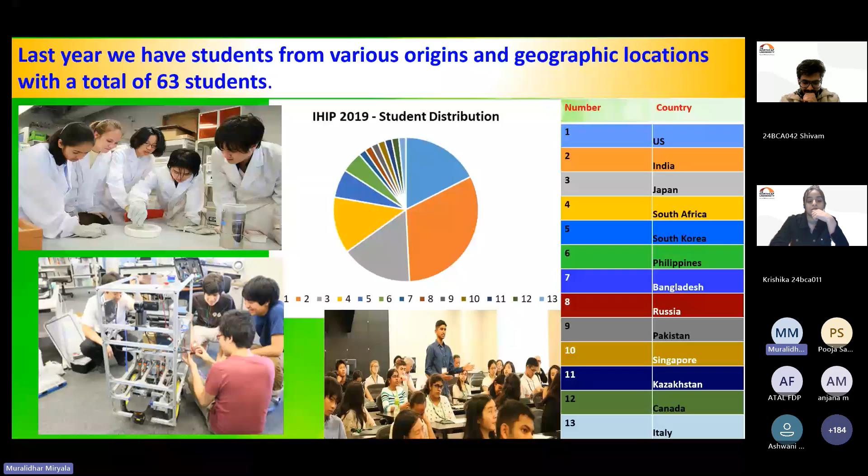This is another short-term engineering English program involving departmental visits, where our Japanese students go to India for a shorter, 2 week based program. At SIT, during winter and summer breaks, batches of 30 to 40 students go to India. We started this in 2013 and are still continuing the program with IIT Madras and Anna University.

So this is how we systematically dispatch our students through departmental visits. In the English engineering program, students have to learn for 3 hours every day, along with cultural visits and cultural exchange trips. Normally on Saturdays and Sundays we arrange industrial visits. This program has also been very successful.

Our Japanese students are enjoying learning about Indian culture and things. This is another global full-time program. As a result, we made the IGP, Innovative Global Program.

This is a 100% English-based program at SIT, and also the graduation course, a 100% English-based master's program. Students can join various departments. Of course, the doctoral program is fully funded, a 3-year program. Everybody is interested, it's very attractive.

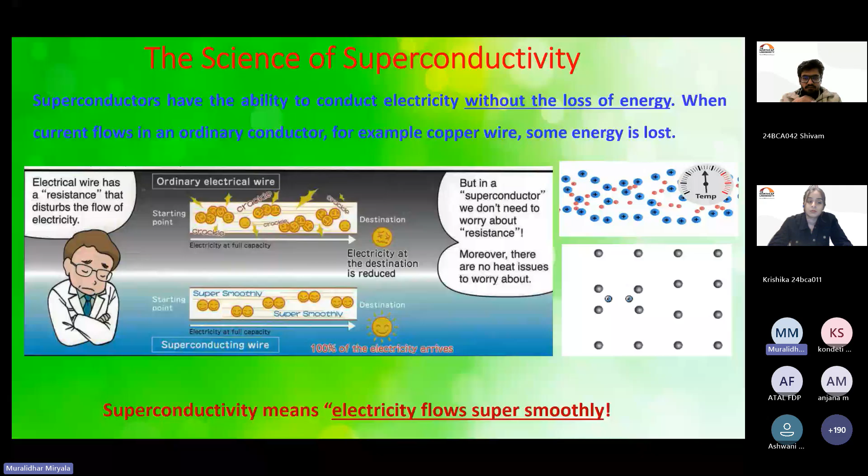Here's a very interesting phenomenon we have to know. When the material transfers from the normal state to the superconducting state, it expels the magnetic field from its interior. This phenomenon is known as the Meissner effect, discovered in 1932 and first observed in 1933 by Meissner in tin and lead materials.

This is called a type 1 material, which has a critical magnetic field, HC. Above it is a normal conductor. In the superconducting state, it becomes a perfect diamagnet, and magnetic flux is expelled, acting to levitate any magnet placed above it.

Then Onnes thought one could make very powerful magnets, because for an electromagnet we send current and the resistance is zero automatically, so he thought we could make it. But here's the logic of type 2 superconductors and the critical magnetic field.

For example, materials like aluminum and cadmium have several critical temperatures, TC, for superconductivity. But if you apply a very small external magnetic field, around 105 Gauss, the superconductor is destroyed. Similarly, for lead, at around 800 Gauss, the small magnetic field makes it disappear. Typically, almost all type 1 superconductors are destroyed at around 1000 Gauss.

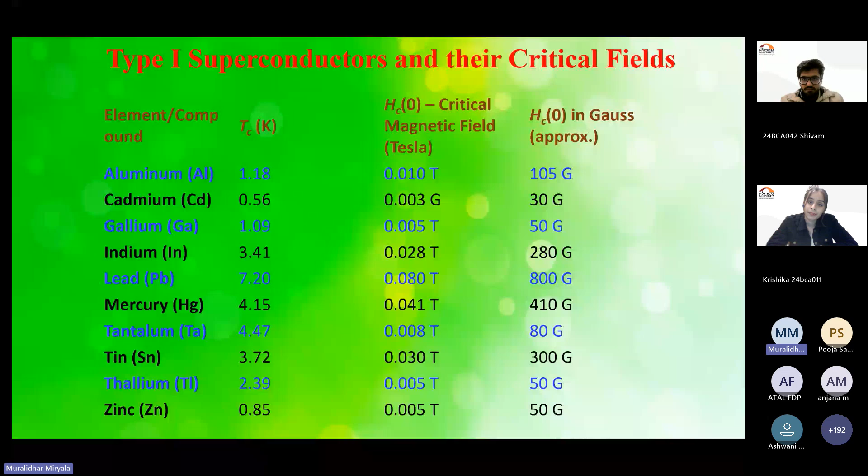So this is one of the great barriers. The dream of Onnes to make a strong superconducting magnet remained only a dream until the 1960s. In the 1960s, a breakthrough came, a new type of superconductor was discovered, called type 2 superconductors, like niobium tin. Importantly, type 2 superconductors have two critical magnetic fields, called HC1 and HC2. Above HC2, it becomes a normal conductor.

Below HC1, it is the perfect diamagnet. Between HC1 and HC2, we have the mixed state, where superconductivity and a magnetic field coexist. In this case, magnetic flux can enter inside. If you have strong pinning centers, it will be trapped inside. As a result, one can make very powerful magnets. That's why NbTi magnets are now being used in hospitals, like MRI machines.

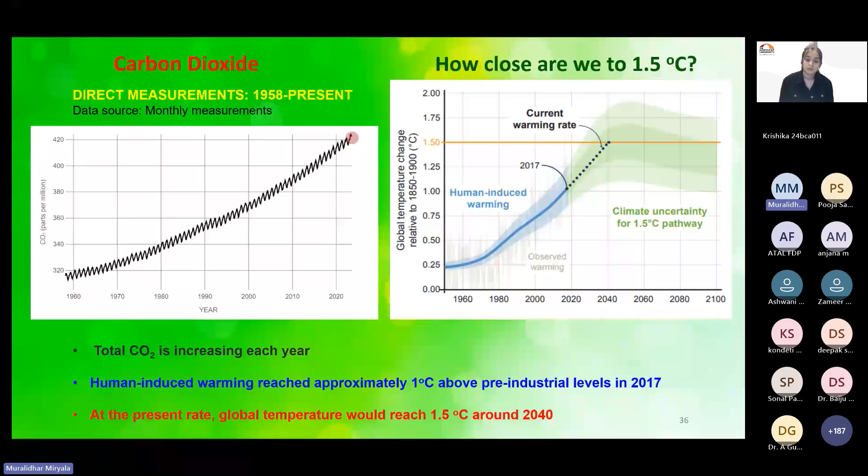Now people are thinking at the present rate it will reach 1.5 degrees by 2040. But the biggest issue is that in the last 2 years, science and nature are clearly reporting extreme heat and loss of Antarctic sea ice as one of the biggest issues everybody is thinking about. Especially, recent surveys clearly indicate that climate change is a major global issue.

According to a 2021 survey, around 60% of young people aged 16 to 25 reported being concerned about climate change. They clearly indicated it affects their daily lives, including their work and sleep. So we have to properly work on how we can address it.

Before I mentioned that by 2040 it's going to reach around 1.5 degrees centigrade of atmospheric temperature. But recent data clearly indicates that on Earth Day 2025, the figure was 429.6 ppm. But even to reverse climate change, even partly, we will need to remove on the order of 2000 gigatons of CO2 from the atmosphere over the next century, which is the biggest challenging issue now.

Recently reported, even though we are talking about an estimated 1.5 degrees centigrade increase, it seems they will increase this before 2030 instead of 2040, which is more problematic. So how do we control this situation?

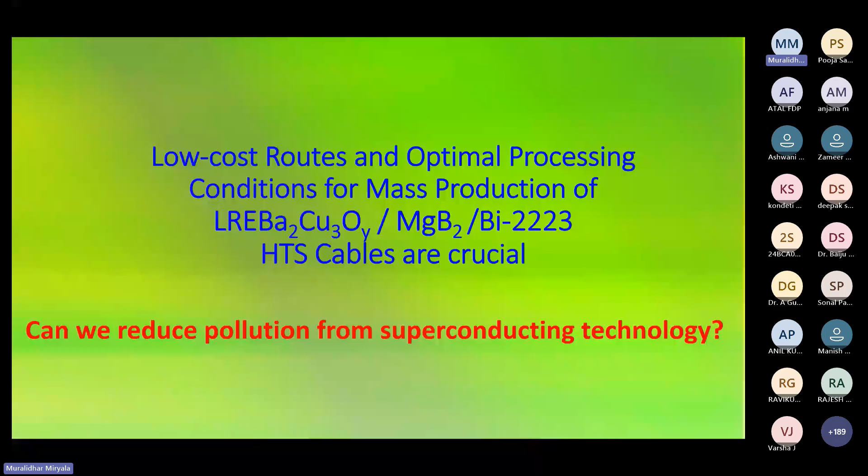We can say like LRE123, MgB2, or Bismuth 2223, where HTS cables are one of the crucial applications. HTS superconducting technology will address the impact of climate change. Energy transportation will be done by HTS cables using Bismuth 2223, RE123, and MgB2, which are already well developed. On the other hand, energy storage through superconducting magnetic energy storage systems and flywheel energy storage can be done using bulk RE123 and MgB2 superconducting magnets.

I want to mention why HTS superconductors matter. They were first discovered in 1986 by Müller and Bednorz, who discovered the new material lanthanum barium copper oxide, making materials superconduct at higher temperatures. Within one year, in 1987, Paul Chu replaced lanthanum with yttrium, raising the critical temperature for superconductivity to around 93 Kelvin, higher than the boiling point of liquid nitrogen. This was very interesting, and people started to work on this material for real applications.

However, with this YBCO material, when you apply a magnetic field of around 3 to 4 Tesla, the superconductivity drops to zero, so we cannot use it for high field applications.

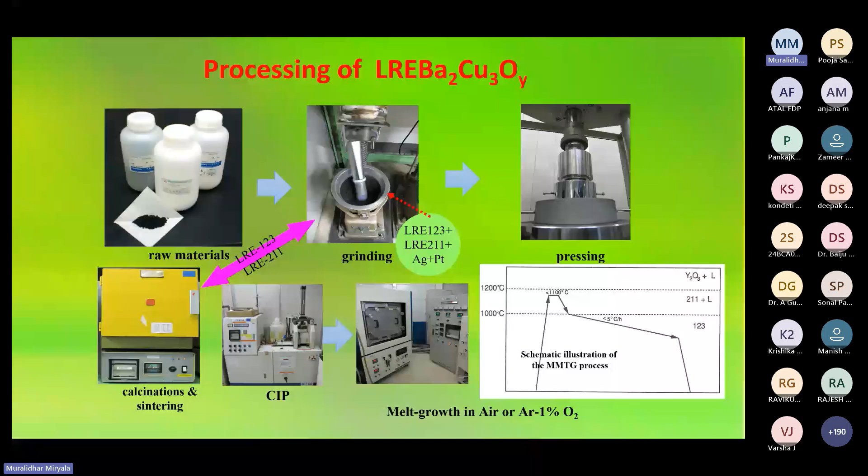So we successfully produced high quality bulk superconducting magnets, among the best in the world. This magnet can trap more than 4 Tesla at 77 Kelvin—I will show some data later. One important thing here is this ternary RE123 material.

We created nano pinning using smaller GD211 nanoparticles inside, which are non-superconducting and pin the flux in high magnetic fields. As a result, one can achieve a very high critical current density.

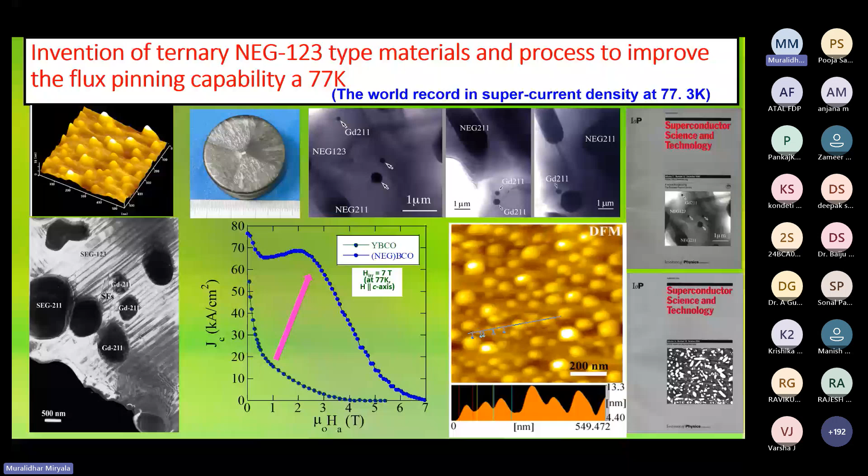This result was featured several times as the top cover of Superconductor Science and Technology journal. This amazing accomplishment was highlighted in many newspapers and TVs, and it was patented in the US, Europe, and Japan, receiving numerous awards worldwide.

Then the second thing - we also made SEG and EG, creating new nanoscale pinning centers visible in TEM. We made very small zirconia-based nano pinning centers, around 30 to 40 nanometers in size. This has been discovered, and we also obtained a new patent on this.

In the case of YBCO, this was demonstrated at 77 Kelvin, but here we achieved 90 Kelvin - the first report of this. This is fundamental and can be used for non-contact liquid oxygen pumps in hospitals, and also for rocket launching technology for superconducting bearings.

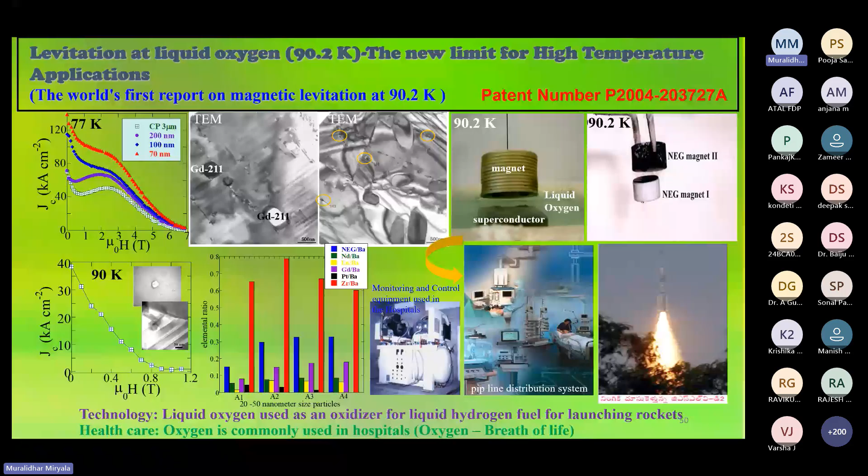Again, these results appeared in the news and TV, and received patents. It also won awards from Japan and different countries.

So when you want to use something at 77 Kelvin, for example, I'm showing a block diagram here from 0 to 14 Tesla, then JC. If you want to make a motor application, 1 to 3 Tesla is very useful.

For other applications like maglev, flywheels, or MRI machines, it's around 2 to 5 Tesla. But people are now working on fusion magnets, which need 10 to 15 Tesla - very, very important.

But in this case, at that time there was no material available. Even at 77 Kelvin, up to date, this is one of the champion data points.

What we did here is a new class of nanoscale pinning media, ranging down to very fine nano order, close to the coherence length. When we manipulate the matrix ratio - 1:1.25:0.85 - it shifts toward a rich direction. We made nano pinning inside at 3 to 5 nanometers, as shown by STM.

As a result, JC which was previously 4 to 7 Tesla is now exactly doubled to 15 Tesla. This means when you control the microstructure in this 1-2-3 matrix, one can achieve a very, very high irreversibility field, which is extremely important for high-field applications using RE123 materials. Introducing flux pinning centers at the nano order is very, very important.

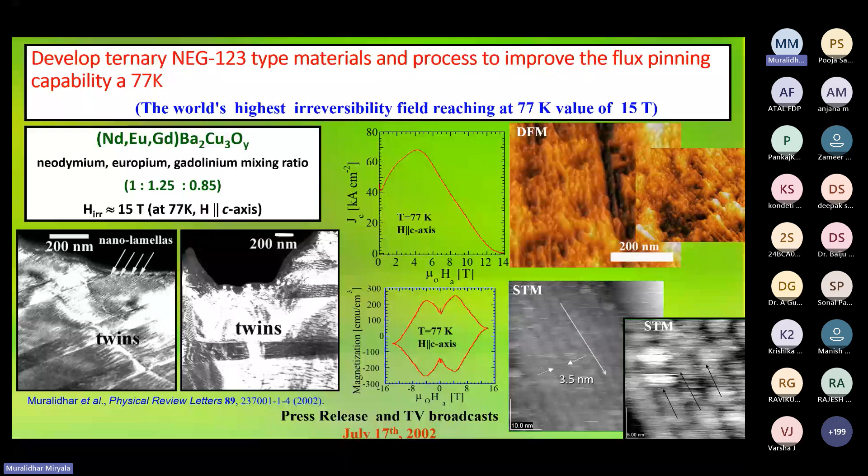As a result, we made larger materials, because the trapped field is proportional to JC times R - meaning carrying capacity times the diameter of the material. We made the world's largest size material as a result.

We cannot have more than that with permanent magnets - it's very impossible. But in superconductors, there is no resistance, so one can make very, very strong magnets.

But the other challenge we faced is that a 2 centimeter or 4 centimeter superconducting magnet costs $3,000 to $4,000, and we needed to reduce the price. So we made it systematically, as I explained, like batch production.

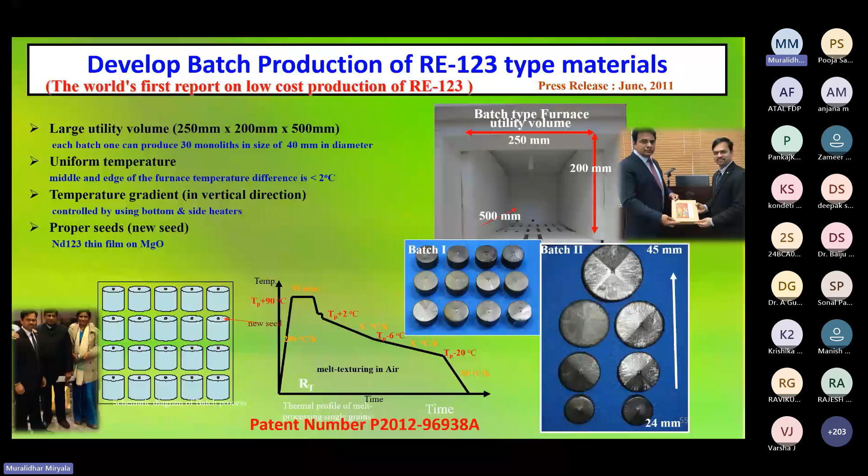In our case, we optimized so many things, and also used this new patent. We made more than 60% reduction in cost. Now this batch production is a more successful development of RE123 systems, low cost. Then people like so many companies are producing yttrium 123, gadolinium 123, ideal material for permanent magnets. That's why they are making so many batch productions.

This is one example. We made a strong and steep gradient generated by the HTSC material to control the drug inside your body. Normally the magnetic field is placed outside the body. The magnetic seed drug is injected into the body vessel and navigated to the desired part by the very strong external magnetic fields. This can be applied, even though this is one example.

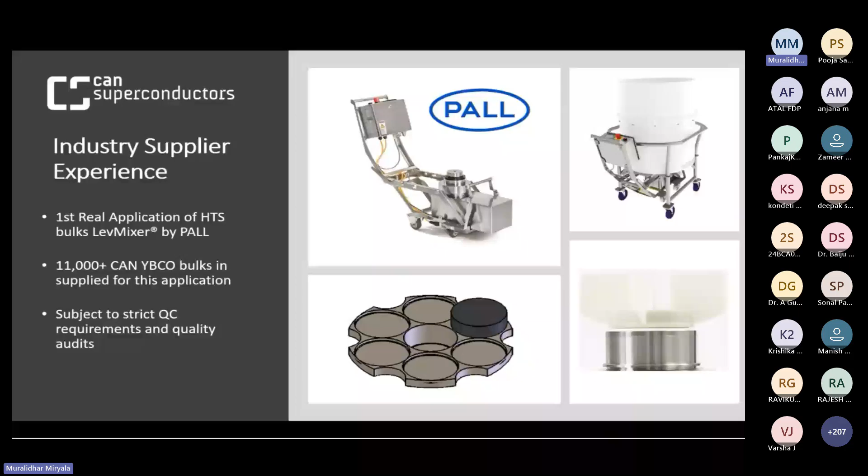Kyushu Electrical Power Company already made a mobile type water cleaning system. I made this in the Kyushu area for several lakes and ponds. This is one of the commercial products. Due to this strong field, one can make it more thin.

So then, one application is transport, where one can use this material. Transport means they always need high reliability, and of course low carbon vision strategy is one of the big players. The Prime Minister of Japan also declared they want to make 50% CO2 emission reduction by 2030, 75% by 2050. Then everybody is putting more efforts into railways as well.

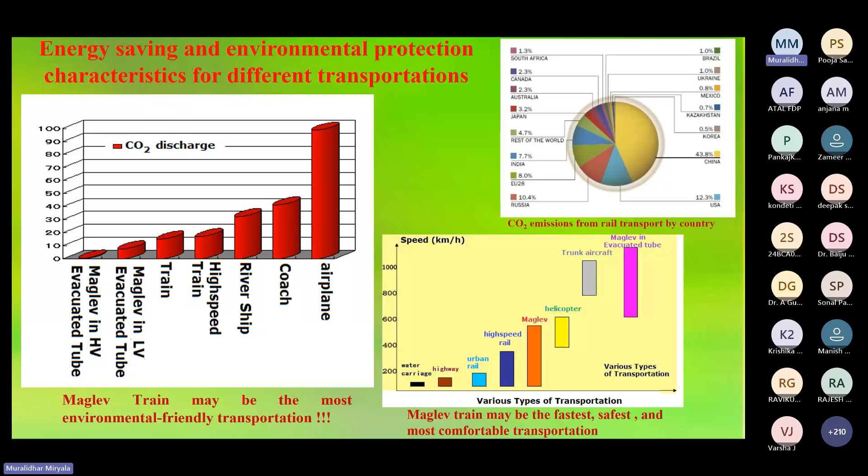If you look at this, the top left figure clearly indicates the lowest CO2 discharge is the maglev, magnetically levitated train, or maglev evacuated tubes. But of course we have to consider the speed too. In this case, the bottom picture shows maglev trains going more than 600 kilometers per hour. This research started in 1972 at RTRI, achieving a speed of 60 kilometers per hour.

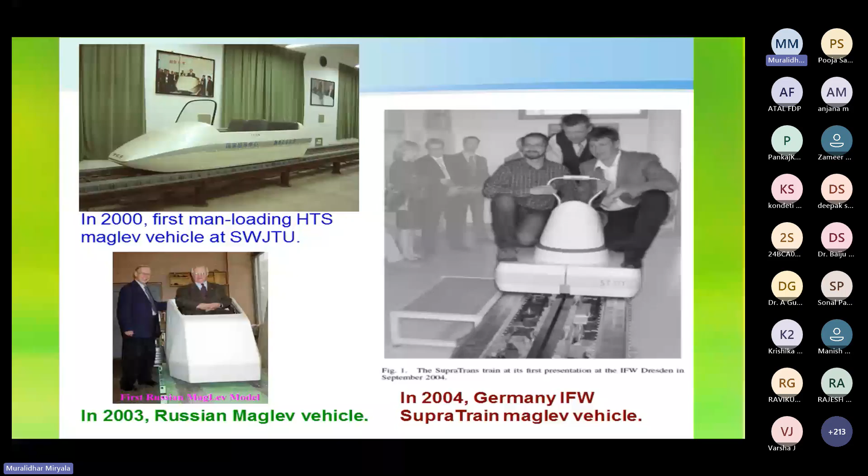This was successfully created, the high TC maglev. After this result, prototype vehicles utilizing the high temperature superconductor were shown by various countries like China, Russia, as well as Germany, and also the prototype vehicle maglev Cobra developed in Brazil, utilizing the same yttrium-123 superconductors and levitation for the transport system.

This is the world's first high temperature high speed maglev, large type prototype, designed and reported in January 13, 2021 by SWJTU, the Southwest Jiaotong University in China. So again, here is the prototype HTSC maglev in evacuated tubes.

Also, of course, everybody knows the Hyperloop. Now the US and Germany collaboration is working, but this is the research collaboration with SWJTU. We supplied the YBCO material and made it work at 150 kilometers per hour inside, and now we are working at 300 kilometers per hour. All these things can reduce low carbon emissions and make our lives easier.

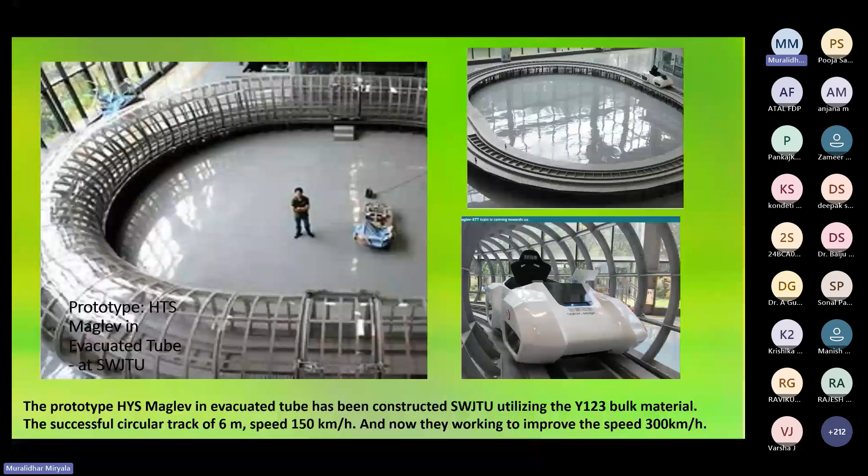Then again, another type of material we are using is the production of low cost and high performance bulk MgB2 material, called magnesium diboride. MgB2 is one of the most low cost, high performance, lightweight materials. One can use it in several industrial applications.

Of recent days, rare earth is the problem. What I showed before is the rare earth based material like neodymium, samarium, europium, gadolinium, made in a 1:2:3 ratio. It will become a super magnet. But here there is no such thing - it's just magnesium and boron. Here is the very interesting part.

One can make it into power transmission, magnetic resonance imaging, MRI. Now Hitachi and ourselves are working together on MRI machines using MgB2, and of course electronic devices, everything - end user, energy sector, medical sector, aerospace, industrial manufacturing, several things. One can make superconducting tapes, and we can use it at low temperature.

Here, one of the major issues is increasing performance, meaning we have to increase the critical current density. What I showed in the table, for motors and generators we need 100 kiloamps per centimeter square. For transformers, 80 kiloamps, then current limiters - where this Mg and boron comes in.

Boron is one of the major drawbacks. Boron's melting temperature is about 2200-2500, while magnesium is 600. Magnesium melts and reacts with the boron to form MgB2. So the smaller the boron size, the better it acts as grain boundary pinning, and as a result the performance goes up.

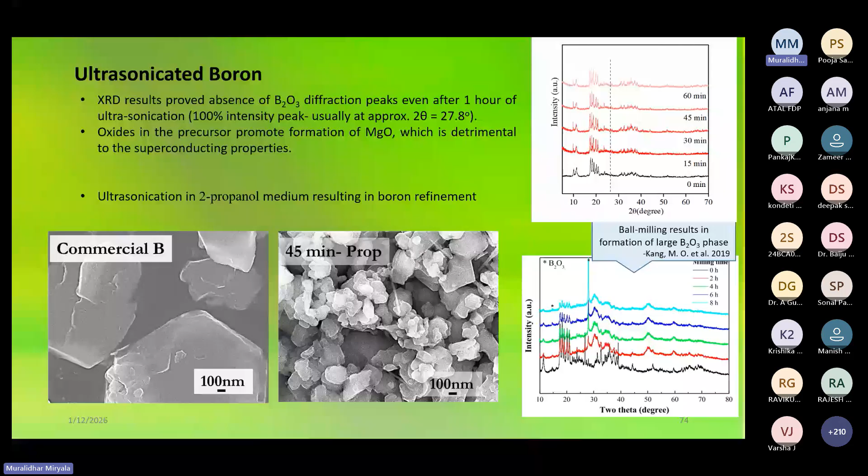Then here, our students and myself designed this equipment more properly for industrial low cost and optimal processing conditions using the ultrasonication technique.

This is the production of nanoboron. Using the cavitation effect, high energy ultrasonification creates ultrasonic waves in a liquid, forming and collapsing bubbles called cavitation. During this process, it generates high temperatures and pressure, shock waves and jets. When these jets and powerful waves are created, as the boron particles come around, they automatically break apart.

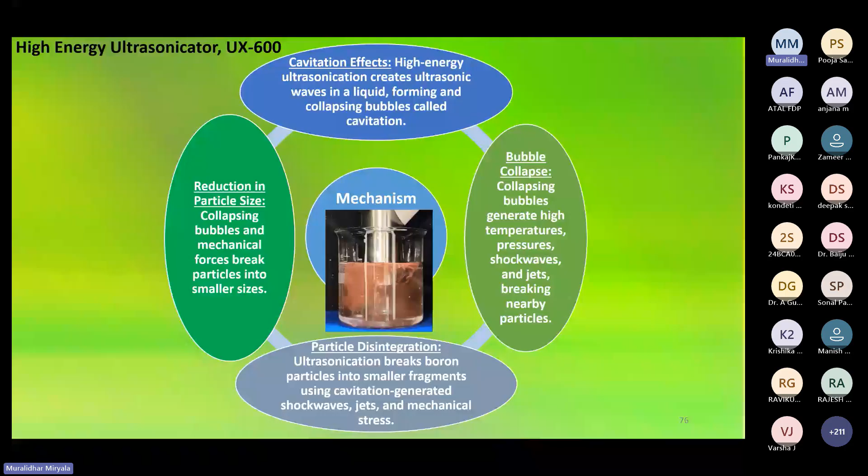This process runs continuously, so one can make nano boron. This is one of the purer methods, allowing very high, smaller particle sizes up to date. During this process, we found that when you utilize high viscosity ultrasonification media, it directly produces a bombarding effect, like a drag force proportional to the bombarding impact.

As a result, the particle size goes down and JC increases when the viscosity is increased. So we use 1-heptanol, which is a high viscosity material. Notably, particle size went down to 170 nanometers. Up to date, no one has reported this.

Then the XRD results, you can see in the right hand side figure, for several hours ultrasonicated in heptanol, from 0 minutes to 135 minutes there is still no contamination. Normally B2O3 peaks are one of the major issues here, but we are not seeing anything, so it was free of impurity phases.

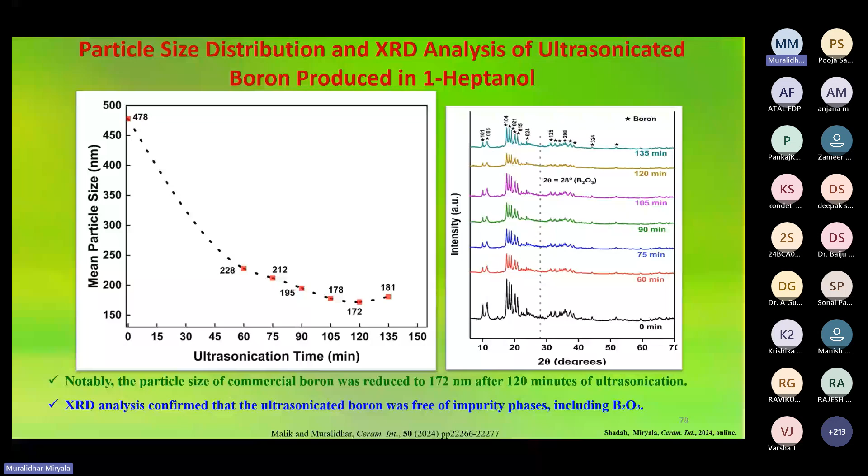Such boron powders can be utilized to make MgB2. This is simple processing: once your nanoboron is ready, we have to mix the magnesium and boron in the glove box. Otherwise, if magnesium is exposed to air, it will react with oxygen and form MgO, which is a non-superconducting particle. That's why people normally do the mixing in the glove box, then pressing and sintering for just 3 hours. It will produce the superconductor. It's very easy, low cost, and lightweight.

Our students are still working to reduce the particle size of nanoboron. We went down to around 150, but the coherence length of MgB2 is around 12 nanometers, so we still have a lot of room to go from 150 down to 72, 17, or 12 nanometers. But in that case we have to optimize so many things. Further, you can use high viscosity material, and tune time, frequency, and temperature, among other factors. I hope we will reduce the particle size further to improve the performance of this MgB2 material.

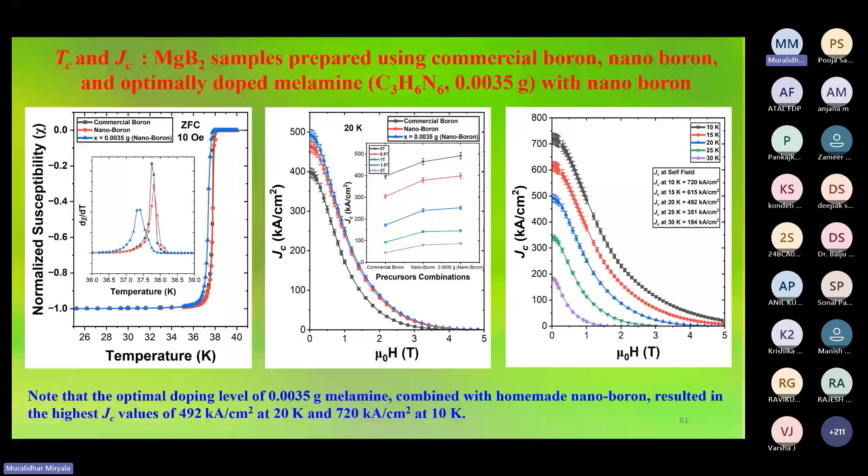But here's the interesting part: we are working with Hitachi, as we need a 5 Tesla MgB2 bulk magnet for MRI, magnetic resonance imaging, for hospitals. If you make an MRI machine using MgB2, it's very low cost. There's no doubt that prices will go down for hospital charges.

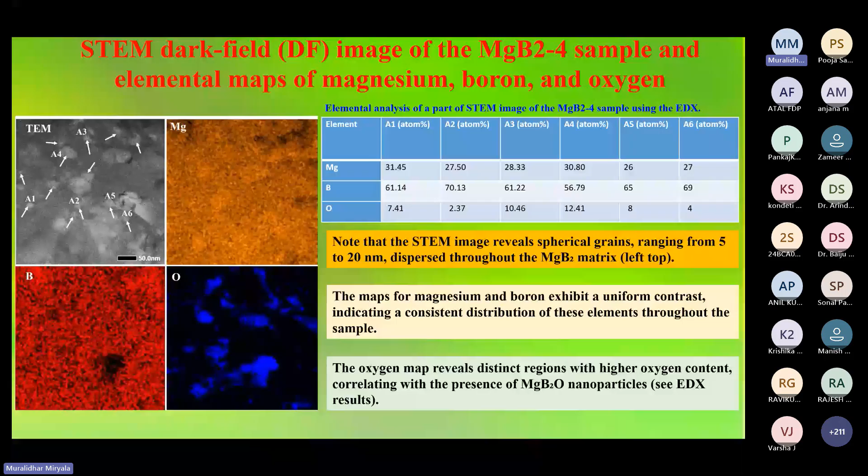If you use this material to make the coil, we can make very high powerful superconducting supermagnets. We also made a patent of this material. So I think in the future, ultralight superconducting magnets, if used at low cost, because magnesium and boron are comparatively rare earth, no, it's very low cost, one will make it. With further reduction of price, one can use it even for windmills, automobiles, rotary applications, washing machines, whatever it may be. This is one of the works we are pursuing. Our students are making further improvement of this material for real world applications.

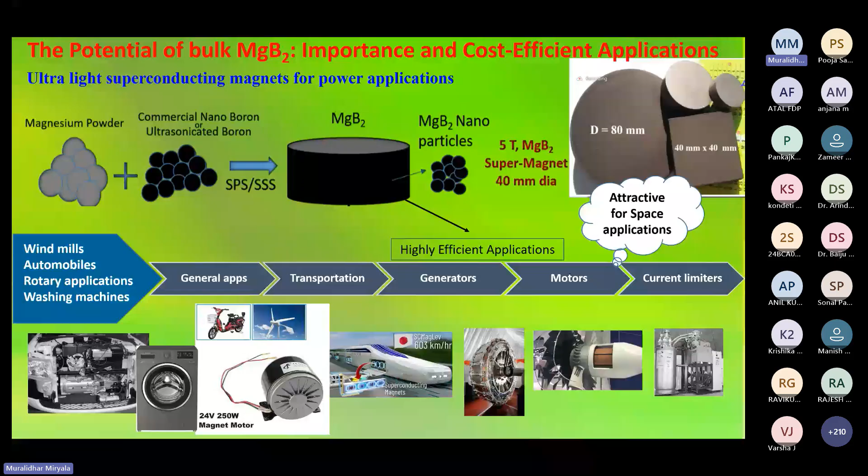Another area is power transmission and generation. Now superconducting power cables are one of the key players. We have several types of materials: Yttrium barium copper oxide cables, and bismuth 2223 and bismuth 2212, MgB2 cables and others, etc. These cables now, worldwide, so many companies are working, like US, Europe, Japan, Korea, and China. They are making kilometers of wire and producing this thing.

Of course this is one of the major things. Global superconducting cable projects are increasing day by day. People are expecting 700 million by the end of 2027. So I think in the future there will be more demand due to energy transport. When electricity is transmitted from the power station to home, it's already shown that 5% is lost, which is roughly the same as the output of 6 huge power plants in Japan. This is a simple example.

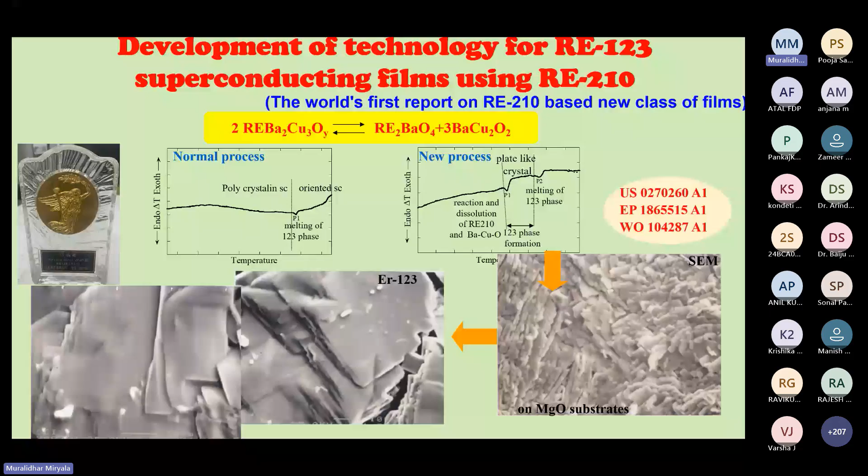So I invested more to make a new class of RE123 superconducting wires, first making silver sheathed tapes, then we also made the initial composition, the 2-1-0 and liquid phase one, to make the 1-2-3. Then superconducting wires were made. This is the first report, and it is 150 amps at 77 Kelvin, sufficient for real application. This is the first report on development of a new class of RE123 PIT-developed RE123 tapes.

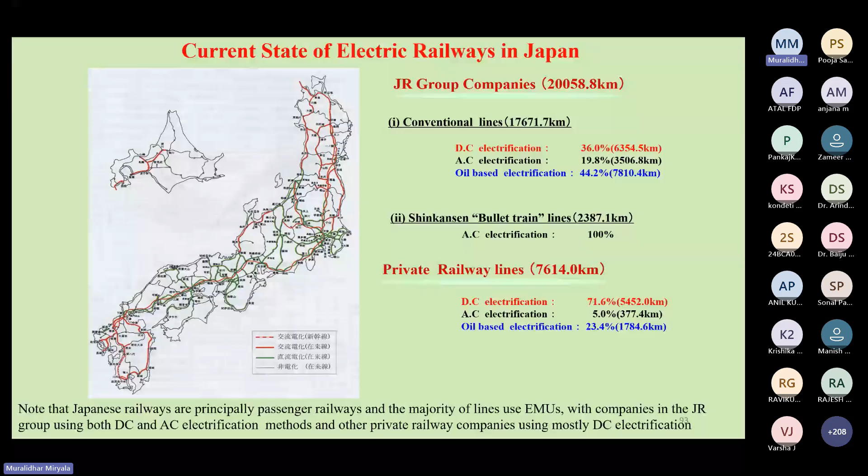Here the major one, HVAC cables is the red one, DC cables is the green one. If you use superconducting cables, due to substation spacing normally 2 to 3 kilometers along the rail track, if you use superconducting cables then we don't need substations. Otherwise for a 30 kilometer rail route we have to put a certain substation due to the DC decay. But almost all the Tokyo area and Osaka area railways, like subways, run on these DC cables. So they were designed, and of course the government is more keen about CO2 emission, so this project was handled successfully.

Then, if you use a normal conductor, we have to change it using substations with a superconducting cable, so if there is no substation we can reduce 5% of electrical loss and also substation maintenance.

Everything will be contributing further to CO2 emission reduction. This is a prototype 2-meter cable. We designed and systematically analyzed the Bi-2223 cable.

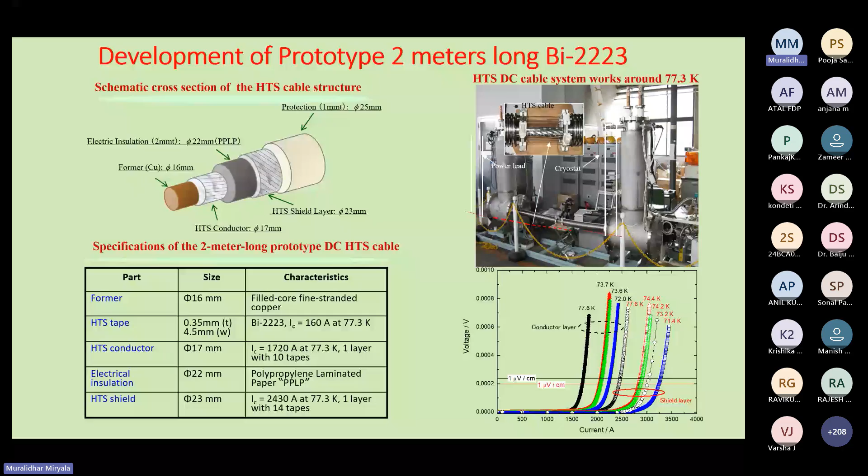Then the question arises: if this material is used sending 1.5 kV, what would the leakage magnetic field be? This is almost always a major challenge in Japan. The Tokyo area train tracks are located very close to residential zones.

So we designed the system considering the current flow. What we did was design this cable so that the conducting layer and the shielding layer carry current in opposite directions. We tested the influence on the leakage magnetic field, and finally found that both the conducting layer and shielding layer, when carrying current in opposite directions, give almost zero leakage field. This means there is no leakage magnetic field effect, and it can be used for railways very easily.

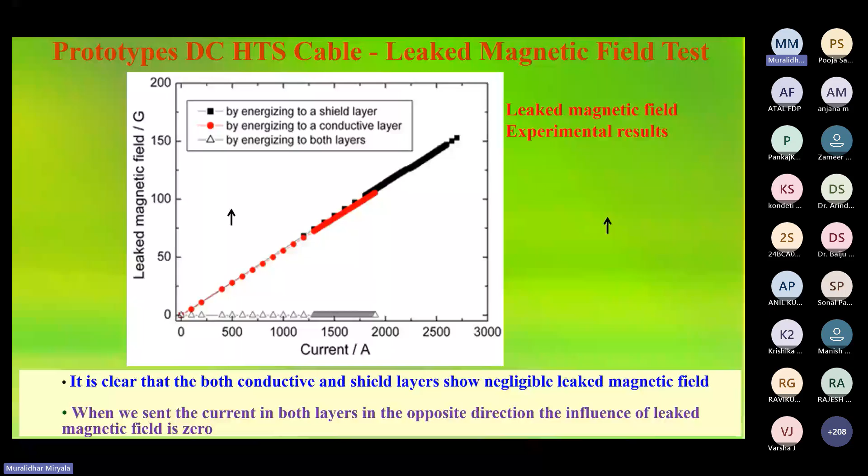The future 2050 vision is for next generation railways. They want to use solar energy, so DC power would be connected directly to the train system. In the future, they will also have HTS power stations that store current at night, which can be used to run the trains.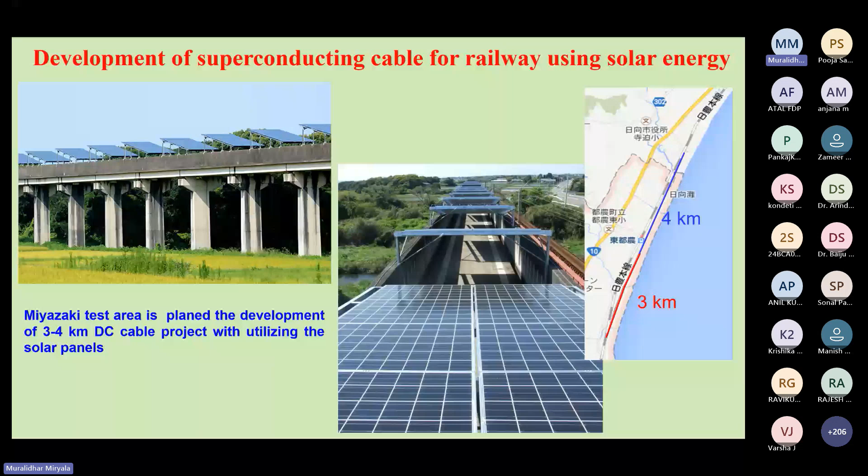Just putting up our slide here: in the upcoming years, DC superconducting cables are utilized to effectively transmit renewable energy, particularly solar power, from 365-days-sunny regions to colder countries. As I told you at the very beginning, fossil fuel will run out in 40 to 50 years.

In that case, we have to depend on solar power, and India is one potential candidate. If you produce electricity using a solar park like a desert, the Indian government has already started one covering 140,000 acres in Rajasthan.

If you produce electricity and want to transfer it, you need a very special cable. If you use normal DC to AC conversion and transport AC from place to place, there are a lot of losses. But if you use a direct DC superconducting cable, you can transport power from North India to South India, or even between Europe and Asia if you have large energy generation.

Because so many countries cannot claim 365 days of sunny regions, this is another very important point — superconducting cables are crucial for the future.

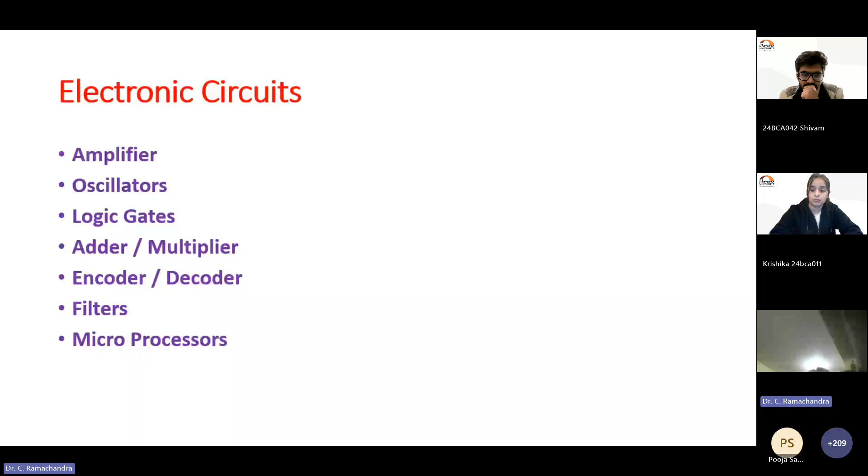When we say electronic circuit, it has different types of applications, different types of circuit configurations. It can be configured as an amplifier, oscillator, logic gates, adder, multiplier, encoder, decoder, filter, microprocessor - I have not listed all. These are all some familiar functional blocks we have been using in the lab.

If you go back in history, the transistor was first discovered at Bell Laboratories in 1947 by three scientists - Bardeen, Brattain, and Shockley. They got the Nobel Prize for this.

Now if you look at the development, in 1947 the first transistor was developed, but it took 15 years to integrate 4 transistors in a chip. That means around 1962-63 we were successful in making integrated solid state operational amplifiers. So it took 15 years, but to integrate 4,000 transistors, it took less than 10 years from there.

So the growth has become very, very fast. And today, in a single IC like a microprocessor, we have more than 10 billion transistors. You can imagine how we have been growing over the last 50 years or so.

How has this growth come about? The designer has challenged the industry: you give me enough number of transistors, then it is my headache to integrate, it is my headache to generate and deliver the circuit you want. Just give me more and more transistors. That is the challenge put by the designer.

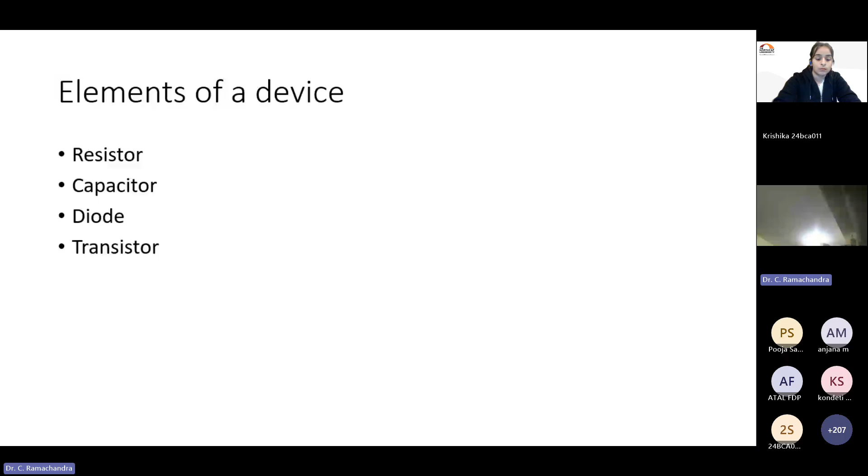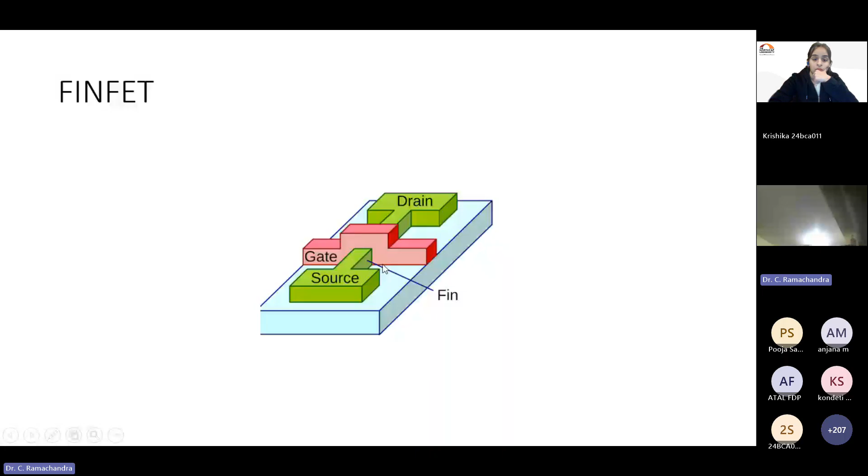So how a transistor looks, for example, I said there are 10 billion transistors. We have source, gate, and drain. This is a MOSFET structure, which was very familiar for many decades. From that, we have moved to the FinFET structure recently, where gate is a fin type structure. Then recently we have moved to gate-all-around, meaning the gate is floating and all around. This is to improve the performance of the transistor and put more number of transistors.

Wafer fabrication, as I said, is a batch process. It is not that a single device is processed. In one wafer, typically we have 1,000 chips. And 25 wafers form one lot. So it is a lot process.

Circuit integration means though we have billions of transistors, it is integrated to do a certain function. That is the challenge or job of the design people. The number of transistors has crossed 10 billion, so we are able to meet the challenge of the designer, who said give me enough number of transistors and we can realize any circuit function. So there is now a competition between designer and manufacturer. We have been successful in providing more than 10 billion transistors in a single chip. Now it is up to the designer how best to utilize these transistors and other components to provide different functions from the circuit.

Now if you look into this, how are we able to put 10 billion transistors in a single chip, whereas chip size has not increased much? We have gone through technology node improvement. This is a 20 micron technology node. What does it mean? 20 micron typically indicates the size of the gate. If 20 micron is the size of the gate, the transistor size is almost double, maybe 40 micron. So from that, we have been reducing the transistor size or gate node: 20 micron, 10 micron, 6 micron.

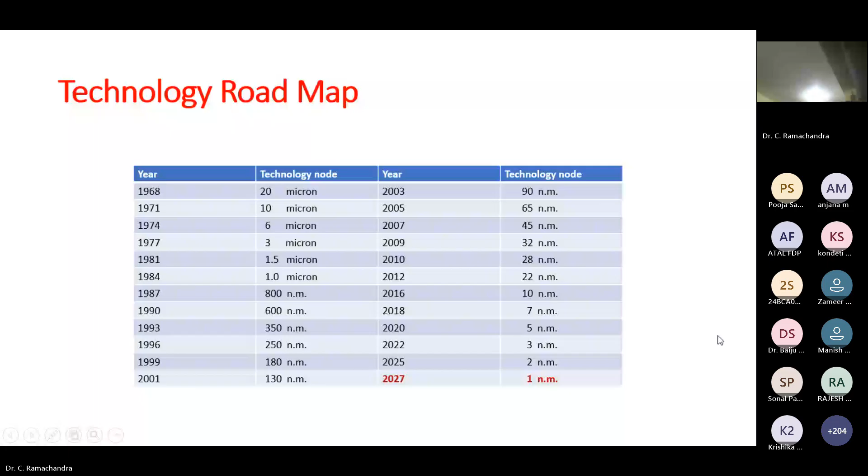Now, what is the thickness of the semiconductor device? The actual semiconductor device thickness is hardly 5 to 10 microns, whereas the wafer thickness is 700 to 1000 microns. Only the top 10 microns is the semiconductor device. Functionality of the device is limited to the top 5 to 10 microns. The rest of the volume is just empty.

The size of the structures ranges from a few nanometers to a few microns. And critically, there are multiple layers in the device, with the number of layers varying from 20 to 200. So it is very important to position these layers and structures very accurately. That is the challenge in semiconductor device fabrication, where lithography and etching play a very critical role.

As a layman, if you want to understand what a semiconductor device is, it has an array of structures of different shapes and dimensions, and it is multi-layered. The number of layers varies up to even 200, or 20, 50, like that. The dimensions of the structures are in the scale of nanometer, submicron, and micron. For example, today the thickness of a gate oxide is about 1 nanometer — 1 or 2 atomic layers. We need to control at that scale.

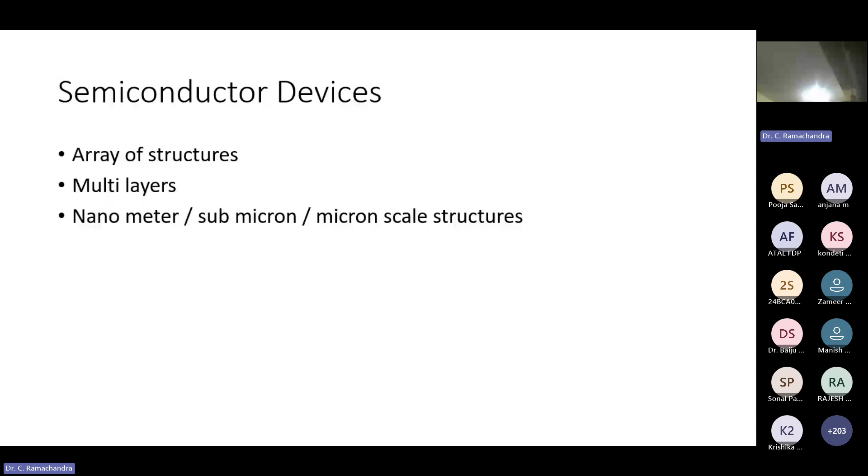Some devices like DRAM and SRAM, microprocessor chips, have built-in memories in the middle. Then the top level, known as the contact level or metal level, has multiple layers of metal, which make connections from one element to another. So it is responsible for that.

The number of metal layers varies. For simple devices it can be 1, 2, or 3. Nowadays it has exceeded 10 in some devices. So this whole structure is not more than 5 to 10 microns. If you have a wafer of thickness 700 or 1000 microns, only the top 5 or 10 microns consist of your active device. The rest is only bare silicon.

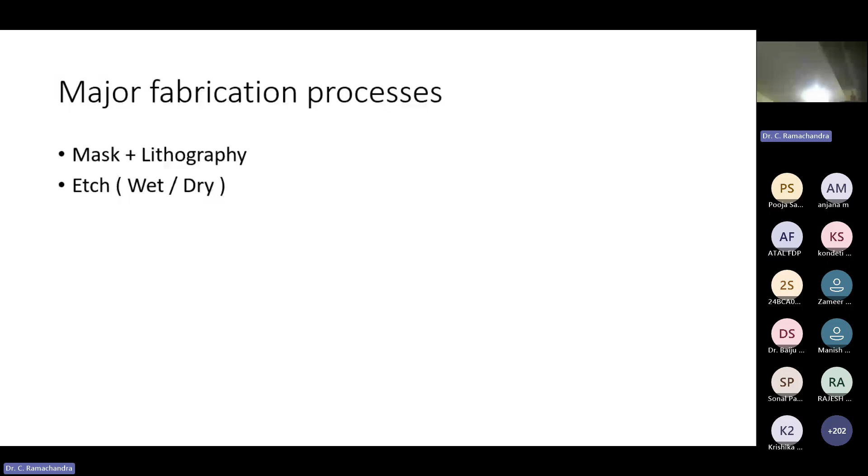The major fabrication process involves mask plus lithography. Etch means removal of the material. These are the two we are going to discuss in detail in today's presentation. And of course, thin film deposition, where we need to add new material where only silicon is present.

There are other supporting processes like doping, which means adding impurities in a controlled way. Cleaning, though it looks very simple, is very challenging because we need to clean nanostructures and remove contamination without damaging the structures. And chemical mechanical polishing, rapid thermal processing - these are all supporting processes. Testing is, of course, at the end.

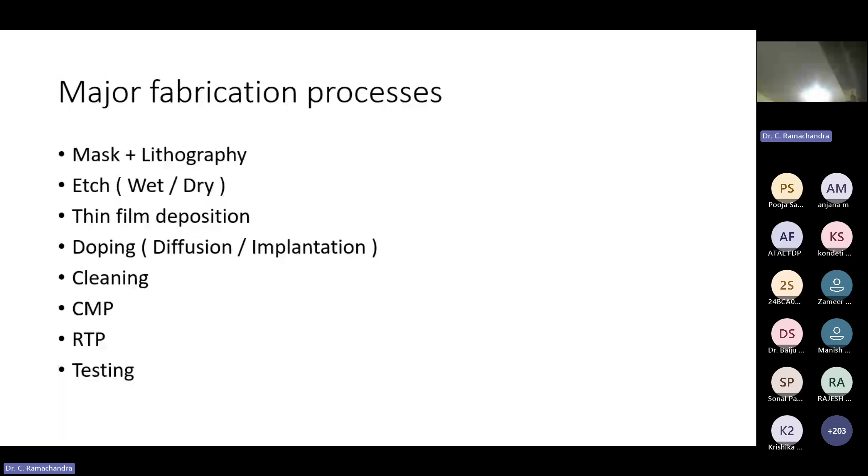The key process which repeats many times is lithography. What is lithography? I need to define the space - that means I want to make some capacitor, I want to make some transistor. First I must define exactly where it has to be put on the wafer. That definition of space, technically we call patterning. That is the purpose of lithography.

Then etching - controlled removal of materials at micron scale, submicron scale. Then deposition means I need to add some new material in that hole. These are the three important processes which repeat several times while making the devices. The whole device fabrication cycle takes 2 or 3 months, but this process repeats dozens of times depending on which IC we are going to fabricate.

We are talking about few nanometer, submicron critical positioning. Even a misalignment of a few nanometers can cause a short or an open, making it basically non-functional. We need to etch deep vertical trenches, and we need to deposit micron and submicron scale thin films in these wires. These are all challenges which are becoming more and more difficult.

When we had 20 micron technology, it was quite bigger, so an error of 1 or 2 microns does not affect it. But now we are moving to nanometer technology, where an error of 0.1 micron is huge - it is unacceptable.

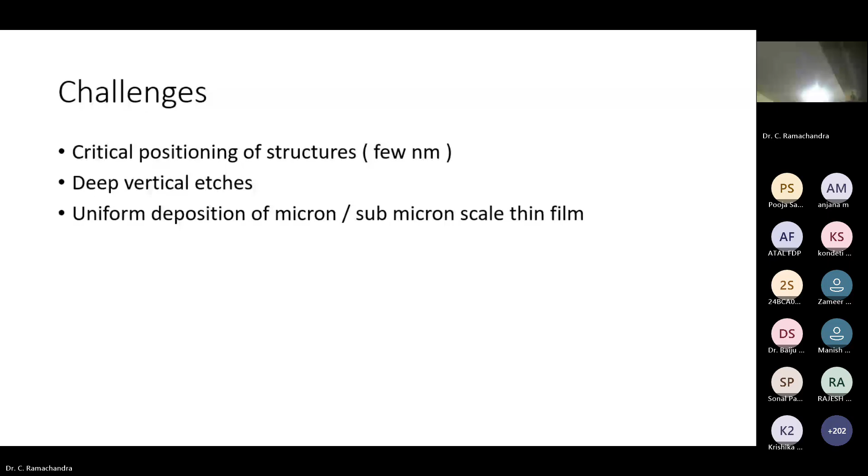Now, first we start with lithography. Lithography asks: what is the smallest structure that we can print on the wafer? Earlier, when we were using 20 micron technology, the transistor size used to be 40 microns, but today we are talking 10 nanometer, 5 nanometer, 2 nanometer. So how can we print such small structures without creating any short or open? That is the challenge when we talk about nanometer technology.

Resolution means what is the smallest difference between one structure and another we can create. Added to that, throughput, because it is a business, a manufacturing process. In industry we typically process 2,000 wafers per day. Otherwise the fab cannot survive economically because it requires a $5 billion investment, so we have to get that back. So throughput - all these processes have to be optimized to get so much output.

So the first step is pattern transfer. Lithography means I need to transfer the pattern onto the wafer. Where is this pattern generated? It is generated in VLSI design. It is the design people who will tell what connections are required between various elements - which transistor has to be connected to which capacitor, to which diode, to which resistor, and so on. All the connections are defined by circuit design people.

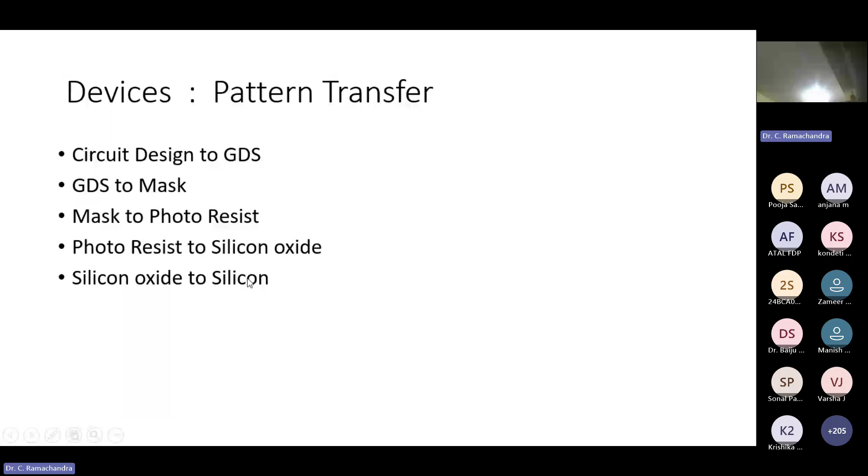These are the important steps in lithography. You have a wafer, then resist application with photoresist, followed by soft baking. Then we align and expose—this is the light coming in. Wherever the photoresist is, it gets softened or hardened depending on its type. Again we bake it, then develop—develop means wherever the photoresist is soft, it dissolves. Then we do metrology, to check whether the pattern we got matches what we wanted and how much deviation there is. That means the pattern is now transferred to the photoresist, and from photoresist we again transfer to the silicon dioxide, and from there to silicon.

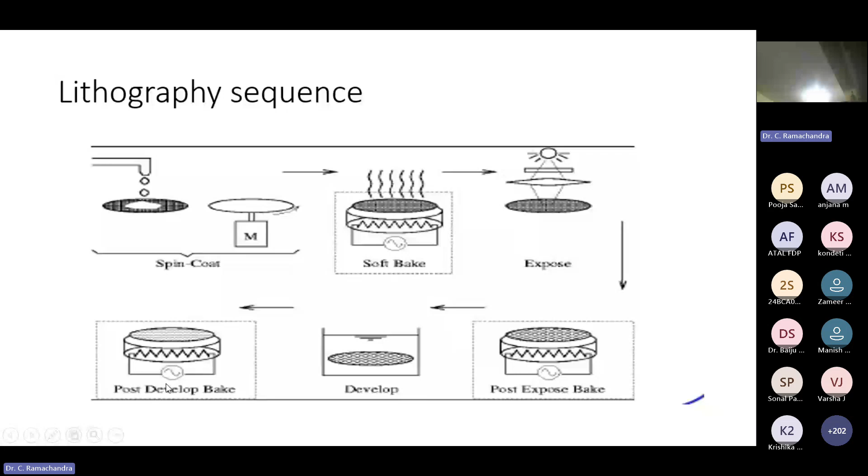You can see it here. This is the wafer, and we spin coat it—meaning we put a few drops of photoresist and rotate it at a few thousand RPM so it spreads uniformly. Then we heat it. This is a critical process: exposure with light. Photo means light—it is a light-sensitive polymer. Wherever light falls, its chemical property changes; it either becomes soft or hard, depending on the type of photoresist. Then we develop and remove the exposed photoresist to get the pattern.

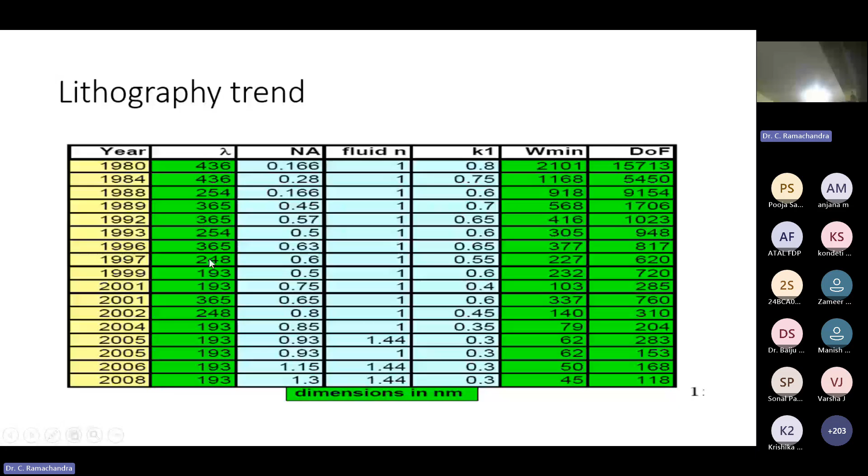Now the trend is how we get the smallest feature. The resolution is determined by wavelength—resolution R equals lambda divided by numerical aperture. So to get smaller features, the only way is to reduce the wavelength. This has been happening: we've been reducing the wavelength of light through various generations, helping to print smaller patterns. We started with G-line mercury arc, I-line, krypton fluoride, argon fluoride, fluorine, extreme UV, etc.

Today there is no choice but to use electron beam lithography. Why electron beam lithography? The smallest wavelength we can control is only with electrons, based on the de Broglie principle—electrons also behave like waves, and the wavelength is determined by momentum. Larger momentum or velocity means smaller wavelength, and velocity depends on energy. So by increasing the acceleration energy, we can achieve a smaller wavelength. That's why electron beam lithography is the latest technique we've been using.

What is a mask? It's an optical filter. Whatever design is there, the design file is transformed onto the silicon using this mask. It has regions of opaque and transparent areas—wherever it's transparent, light passes through, and wherever it's opaque, light does not pass through. That is the purpose of the mask: your design pattern is first printed on the mask.

When we expose, we don't expose a single die at a time—we expose multiple dies, called a reticle. A 2-by-2 reticle exposes 4 die at a time. A 2-by-3 reticle exposes 6 die, and a 3-by-3 reticle exposes 9 die, because exposure isn't limited to one die—at a time we can expose 4, 6, 9, etc. This is known as a reticle. You can see reticles and masks here: wherever the mask is transparent, light passes through; in other regions, light does not pass through.

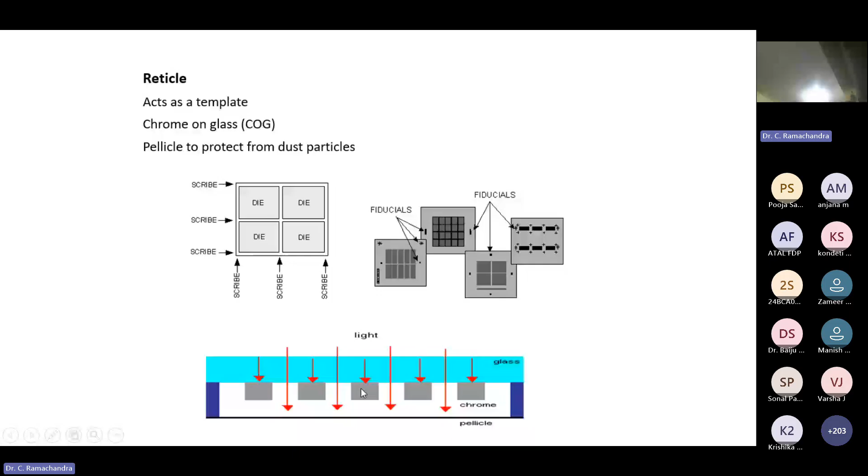So we have two types of exposure system. One is step and repeat. Another is step and scan. This is the latest one. It scans continuously and has very high resolution advantages compared to step and repeat.

We won't go into the details of that one. But for your information, one scanner costs nearly $300 million, and we need at least a dozen scanners to meet the throughput of 2,000 wafers per day. So this is the typical wafer fab, how it is done. Lithography.

Now, how do we transfer the pattern from mask to the silicon? As I said, it is not a single step process. It has multiple steps. This is the starting material, silicon. I cannot transfer the pattern directly from photoresist to the silicon.

The first step is I deposit silicon dioxide. So on the silicon, I deposit a thin layer of silicon dioxide. This dioxide I'm going to remove it later on, which means it does not have any performance in the device. Therefore it does not need to be very good quality. So generally we use wet oxide for growing this one, which is very fast and low cost.

Once I deposit silicon dioxide, typically 1 to 2 micron, then I deposit photoresist, which is also typically 1 or 2 micron. So I want to create a pattern, but I cannot create it directly. Therefore I'm depositing silicon dioxide, then after that I'm depositing photoresist.

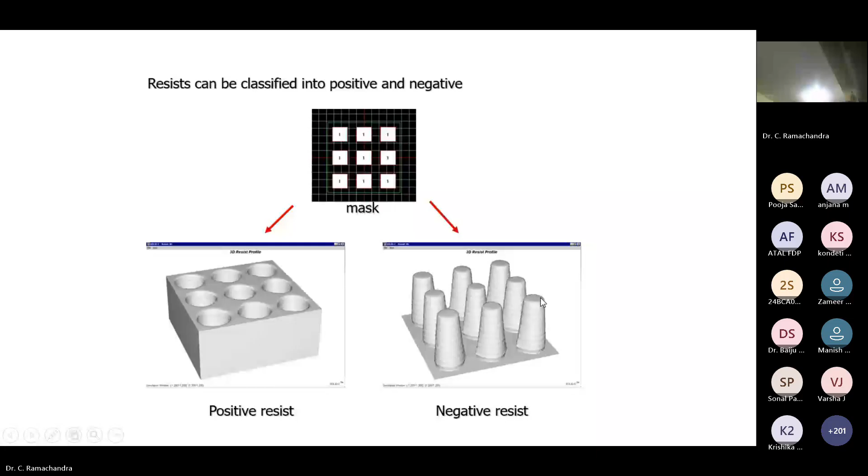So how do we counter this? How do we solve it? This is the challenge of lithography. And when we go to the micron scale, sub-micron scale, nanometer scale, the challenge becomes much more severe.

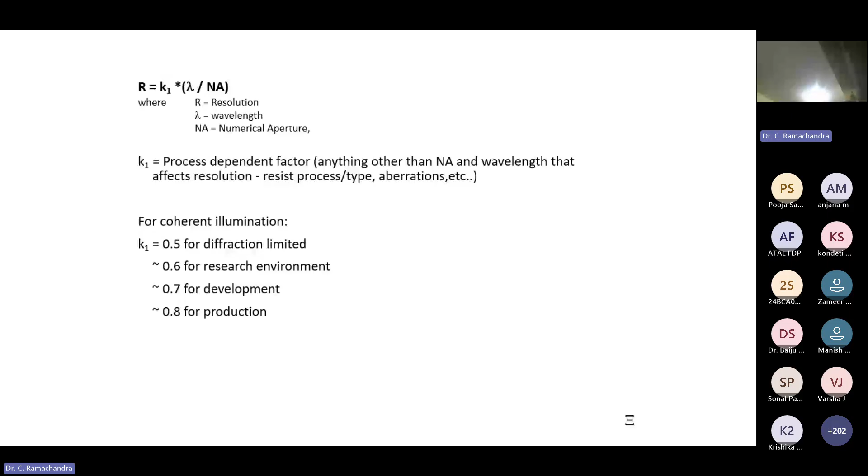At 45 nanometer technology and below, we have gone to immersion lithography. That means the whole optical system's media is immersed in water. Since water's refractive index is nearly 1.33, it improves the resolution by 30%. So this is the latest technology, 45 nanometer and below, immersion lithography, where the whole optics has liquid flowing and immersed in it.

But there are many challenges. The water flow should not create any problem, there should be no turbulence, and there should be no contamination blocking the transmission of light. It's not easy; it looks theoretical, but it has been implemented for 45 nanometer and below, because it gives an improvement of about 33% in refractive index and resolution.

So these are all the challenges we are having. There is still a lot of scope when we go to the micron scale, sub-micron scale, and nanometer scale: how do we get the distortion-less pattern transferred to the wafer, given the pattern we have on the mask?

How to get the same pattern on the photoresist? How to replicate the same thing on the silicon dioxide? How to replicate the same thing on the silicon? At various stages, distortion takes place, and we have to minimize it. There is a lot of scope for R&D and opportunities with different light sources, different optic systems, different process optimization. So this is one aspect of lithography.

Once we have the pattern, the second critical process is etching. What is the meaning of etching? Etching stands for removal of material. Removal means I need to remove material so that I can add new material. Because in a silicon device, there are various materials - aluminum, copper, silicon oxide, silicon nitride, memory cells, different materials, polysilicon - so many new materials. How can I add unless I remove it? Therefore, I need to remove the material in a controlled manner at controlled locations. That is the purpose of etching.

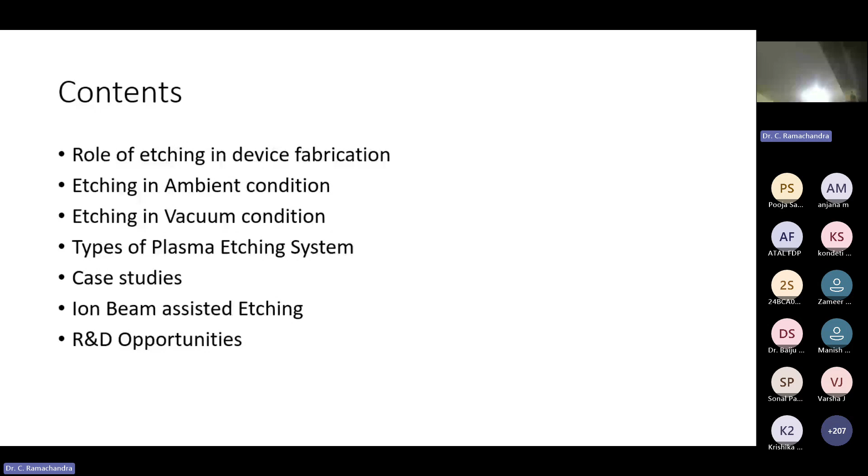When these features are very thin, like 0.2, 0.5 micron, even if I assume some few ions go inside and react, it will generate byproduct. Then what is the probability this byproduct comes out? If this byproduct does not come out and stays, then my whole purpose is defeated. So removal of the byproduct is equally or more challenging in etching. Therefore, I need to optimize so many parameters to make sure enough ions go inside to etch, and these byproducts are volatile and come out. These two criteria have to be met, which is very, very difficult and challenging.

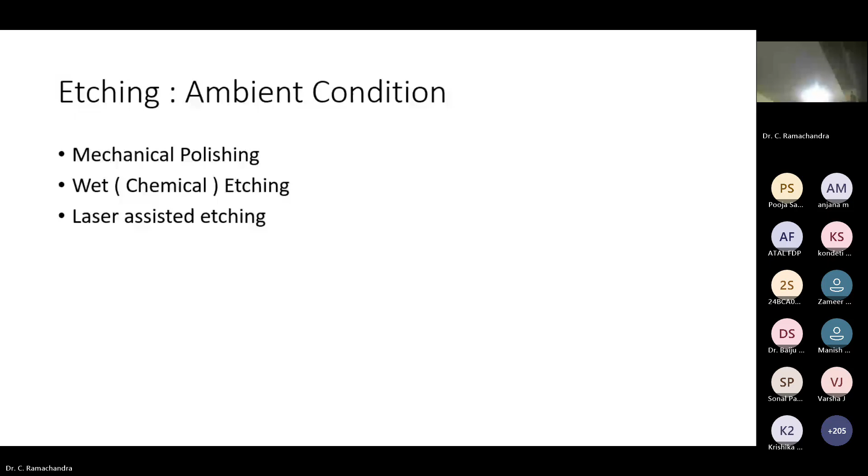So if you do mechanical polishing, it is good enough just to remove the material. It has very poor selectivity. It does not bother whether it is silicon oxide or silicon nitride. It just removes whatever comes on the way. So very poor selectivity. Therefore, it is useful only when selectivity is not at all the criteria.

You just need to thin the sample by a few microns. It is okay, it is low cost. It is difficult to control thickness. Therefore, one has to use proper gauges and keep on watching in between. Of course, it is low cost and most of the time it is manual.

In some equipment, it is semi-automatic operation. That means you can set the thickness, say 5 micron, 10 micron. There is a gauge, it will stop after removing 5 micron. And it is non-localized, that means the whole device or whole wafer, it will do it.

And it generates a lot of particle contamination. That is one of the biggest challenges in device fabrication. Removal of contamination, or avoiding contamination, is a requirement. Therefore, it is not used for device fabrication. However, it supports some other activities in devices, like testing or anything.

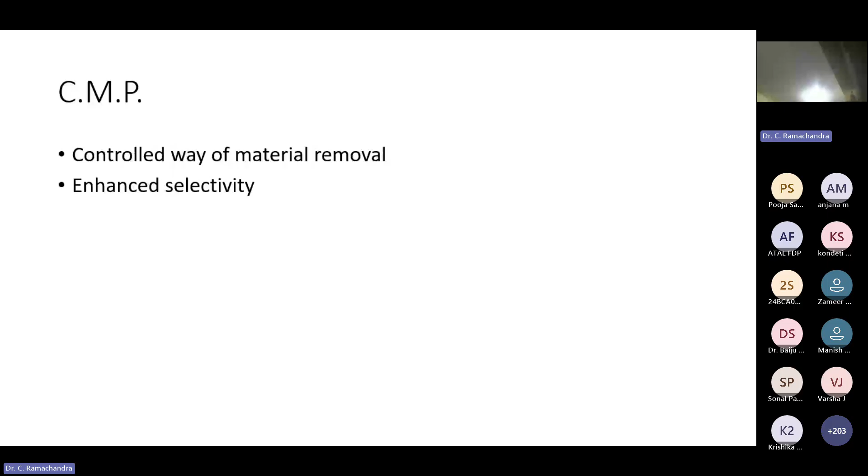So CMP is a slightly added version of polishing. Here we add some chemical pads so that with selectivity, it removes silicon nitride more compared to silicon oxide. So it has different chemical pads. By using different chemical pads, I can remove one material preferentially compared to the other. That means it has better selectivity compared to the polishing. It's basically polishing, but I have chemical pads in this one.

So I can choose different chemical pads so that it can remove either aluminum, silicon nitride, or silicon oxide. Differential etching is possible. So again, it uses slurry. In fact, if you look into the 1980s and 1990s, it was considered one of the dirtiest processes.

It was banned. You can see 200 research papers on CMP. It was banned, but again it has been reinvented. There is no permanent friend or enemy in semiconductor. Today it is one of the unavoidable processes. We need it actually. Similarly, if you look into research papers during 1980, copper was banned.

You can see 200 research papers on copper-induced damage, copper-induced degradation and device failure. You can see it was banned. People stopped using copper. But today, without copper, you cannot do it actually. Again, it has been reinvented by solving so many problems.

That means things will come and go, they take different forms. Therefore, CMP was banned earlier, it has again been reinvented with a lot of improvement. Similarly, copper was banned, again it has been reinvented. So this kind of thing keeps on happening in device technology.

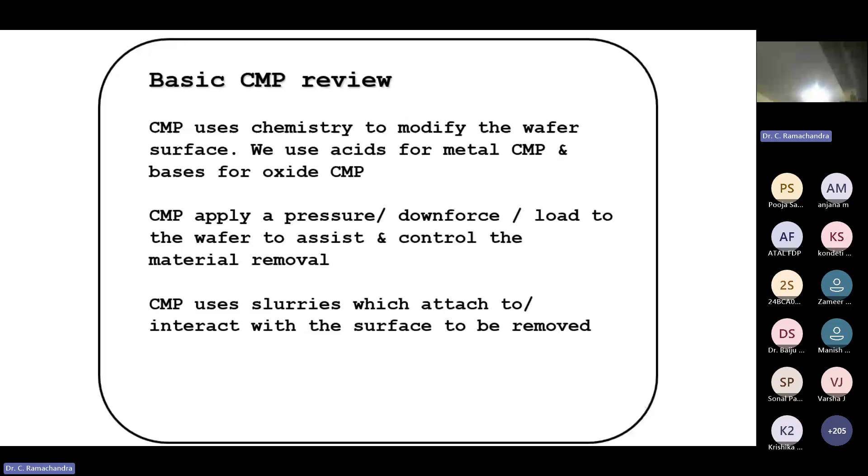So wet means it is a liquid, chemical basically. So the advantage is very, very low cost. The biggest advantage is high selectivity. That means I want to etch silicon dioxide but not silicon nitride, I can choose a proper chemical.

I want to etch aluminum but not silicon dioxide, I can choose a chemical. So chemicals provide very high selectivity. So selectivity is the criteria. This is the best method available, and low cost.

The problem is poor profile control. It etches in all the directions, so you cannot have a profile only vertically. Isotropic means it etches in all directions. Therefore, in some applications isotropic is acceptable. Definitely, it is the best thing to go for wet etch because of low cost.

Another problem is safety concerns, because we are using some dangerous chemicals. We need to be very, very careful. We need to practice all the safety precautions. For example, when we use acid like sulfuric acid or nitric acid, one drop falls on my skin, it burns. Immediately go and wash with water.

But some chemicals like HF, I don't feel anything. It looks like cold, but it will get into your bone and damage your bone. So we don't even feel it. These are all lot of safety concerns, a lot of training is required. Because we are using a lot of chemicals, we should use proper humidity control and exhaust, and train the people. In fact, however much training we give, there will be some accident.

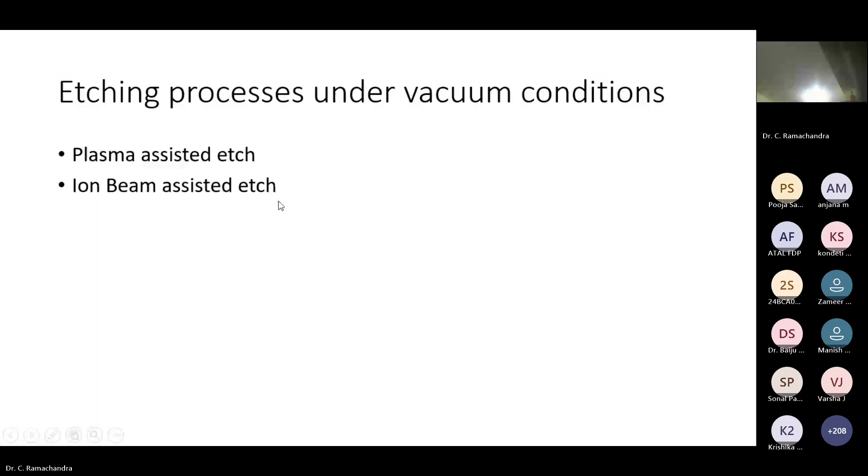Now compared to cost, wet etch is very, very low. Any R&D lab can have it for a few lakhs, but plasma etch equipment is all in the crores. So that is the difference. Any small experiment in an R&D institute or academic institute, we definitely prefer wet etch, but for manufacturing, high end production, plasma etch is definitely the choice.

So this is plasma etching. There are different types of plasma assisted etching. By the way, what is plasma? I believe all of you know it is the fourth state of matter. When we heat solid, like ice, it becomes water, a liquid. If you further heat water, it becomes vapor, that is gas. If I provide further energy to the vapor, even the electron gets separated from the molecule, so that is called plasma - an ionized state where even the electron is no more remaining with its parent atoms.

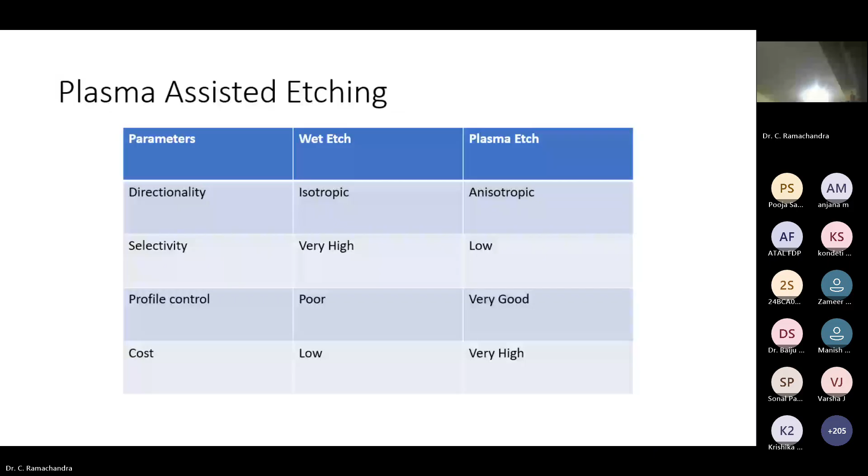Selectivity - what is the meaning of selectivity? You have different materials, maybe silicon, silicon dioxide, silicon nitride. When I put chemicals, how differently does it etch different materials? Does it etch silicon more than silicon nitride, or more than silicon dioxide? This is selectivity, this is very important - how the chemistry we have chosen etches one particular material and not the other. This becomes very important.

So plasma is the fourth state of matter, it contains electrons, ions, and neutral atoms, and it has to be generated. Typical parameters include an RF diode configuration for high density plasma. Typically the vacuum is in the range of millitorr, and the power varies from 50 to 5,000 watts. Then frequency - the operating frequency - there are certain allocated frequencies, I cannot choose any frequency of my choice. For industrial application, there are certain allocated frequencies, only those we have to use. Then volume, typically for production purposes these are good enough, and sometimes we need to apply a magnetic field to confine the plasma.

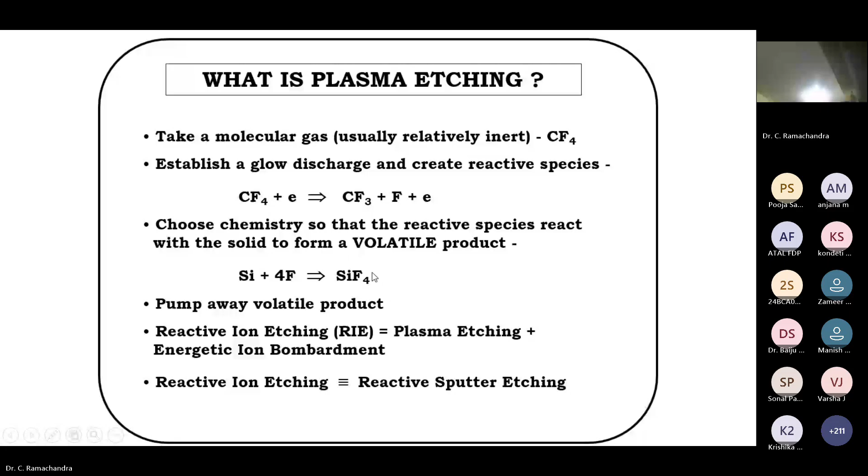So typically, the selectivity of etching silicon to silicon dioxide should be more than 100. That means if we etch 100 micron silicon, hardly 1 micron should etch in silicon dioxide. That is the meaning of selectivity.

Non-uniformity: of course I have 18 dia wafer, 12 dia wafer, and I want everywhere the etch rate to be uniform. But theoretically or practically it is not possible because plasma density itself is not uniform. If you have studied plasma, you have seen it. Plasma tries to repel each other, so they try to move out. At the edge, density will be more; at the center, it is less. Therefore, plasma density is not uniform, and there are many other reasons. So it is difficult to achieve better than 5%, but still 5% is somewhat acceptable.

Another thing is contamination. I have engineered the gases, and there are so many particles. You should not deposit on my wafer. So there is a restriction or limitation on the contamination which gets deposited on my sample. It should be less than 10 to the power of 11.

Then, because energetic ions are bombarding, I have a gate - meaning transistor structures - that also gets absorbed by some of the ions. And when an ion is absorbed by the transistor, its threshold voltage will shift. So there is a restriction on the threshold voltage deviation: it should not drift by more than 50 millivolts. Similarly, gate leakage current should not increase by more than 0.1 nanoampere. So these are all the requirements or constraints I have while optimizing various parameters.

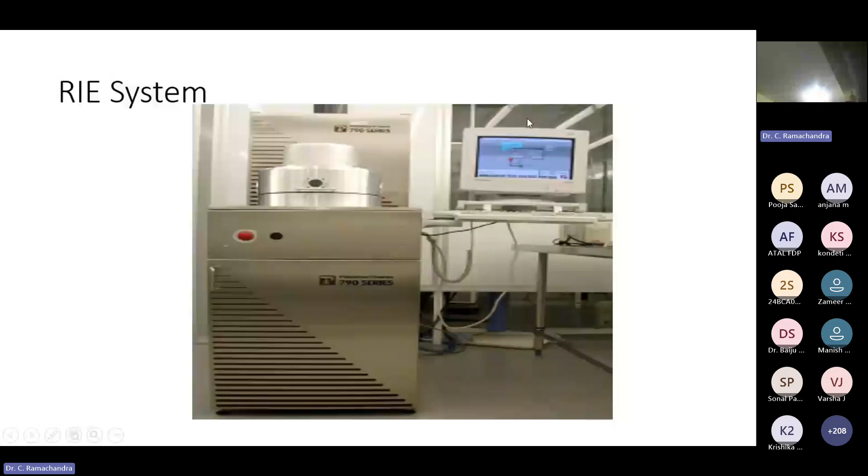So it is an anode and cathode, a 2 electrode system. Vacuum chamber: typically we operate at 10 to the power of -1, -2 torr, a typical range.

And we need to have a gate valve, since sometimes we need to control the flow of the gases. Mass flow controller is very important.

We use different gases, and the flow rate is very important. We need to control it very precisely. If it is 50 SCCM, it should be 50 SCCM. 60 means 60.

So very precise control of the flow is one of the important parameters in controlling the etch rate and other parameters. And as I said, there are different configurations: we can have a DC plasma system, RF radio frequency, microwave, etc.

One of the important things is the impedance matching network. If I use RF field or a microwave generator, there is a reflection of the power, and that reflection should be compensated and well adjusted. If the reflection is more than the limit, or if it is fluctuating, then I completely lose control of the process.

Therefore, a built-in impedance matching network is one of the key requirements, so that the reflected power is less than whatever is set, maybe 10% or 15%. This is a part of the system.

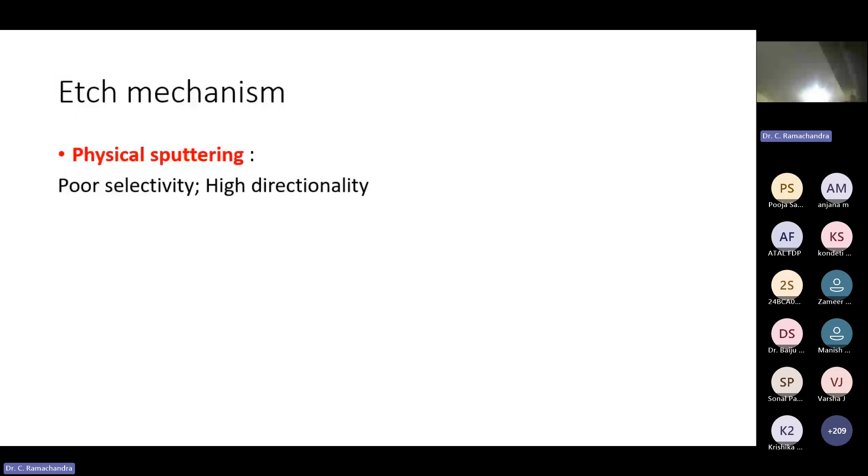Chemical etching: here a chemical reaction takes place, therefore it is very selective, high selectivity, but it is bit isotropic. Therefore, in the plasma chamber, we combine the parameters such that I want high directionality and at the same time high selectivity. So I cannot have pure physical sputtering.

If it is pure physical sputtering, my selectivity is lost. If it is pure chemical etching, directionality becomes poor. Therefore, I need to take advantage of both these mechanisms. So the process parameters I am selecting should give as high directionality as physical sputtering, and as high selectivity as chemical etching. This combination is very important depending on my structures. So these are all the challenges of process optimization and parameter selection.

So we need to etch various materials: silicon, silicon dioxide, silicon nitride, silicon doped, undoped, N-type, aluminum, molybdenum - there are so many compounds. We have already tried so many chemicals, and these are all some of the established chemicals which have shown good results.

It does not mean it is the end - it is an open research. One can work with new kinds of chemicals which may probably give better selectivity, better etch rate. So it is open research, but these are all some of the standard agents industry is using today, though it is not limited to these.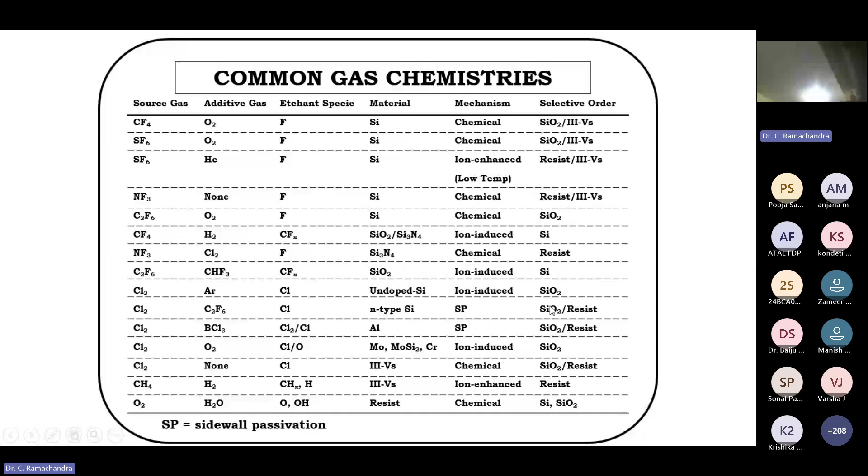Once again, there is a wide scope or opportunity available to try different kinds of chemicals and see how I can get a better etch rate, better profile control, lesser damage, lesser contamination. So improvement is always open - one can try different chemistry.

As I said, these are all the kinds of structures. We have vertical structures, which are very, very challenging to etch actually. See, you have such a deep structure - the width diameter is 0.2 micron, whereas the depth is something like 5 micron. How to create this kind of structure? As I said, there are two challenges.

What is the probability my ions will go inside these deep trenches? Why would they go? They are ions, they are gases - they move by themselves. There is no preferential reason for gas molecules to come here, no specific reason. Even assuming some molecules come here and react to generate byproduct, what is the guarantee these byproducts will come out and escape? There is no reason - they can stay here, they can stick into this. This is quite challenging when we want to have deep trenches.

It is not easy, I'll tell you once again. In industry, the person who knows etching of deep trenches and lithography is really highly in demand in the whole world. It looks very simple, but it is very challenging. The slightest mistune and you lose everything.

So there are important steps in plasma etching. First of all, the radicals are generated in the plasma - that means ions, due to the bombardment of electrons in the chamber. These radicals have to diffuse and transport, and they should move towards the sample. Otherwise, if they don't move and come to the sample, generating the radical is of no use. So it has to come to the sample.

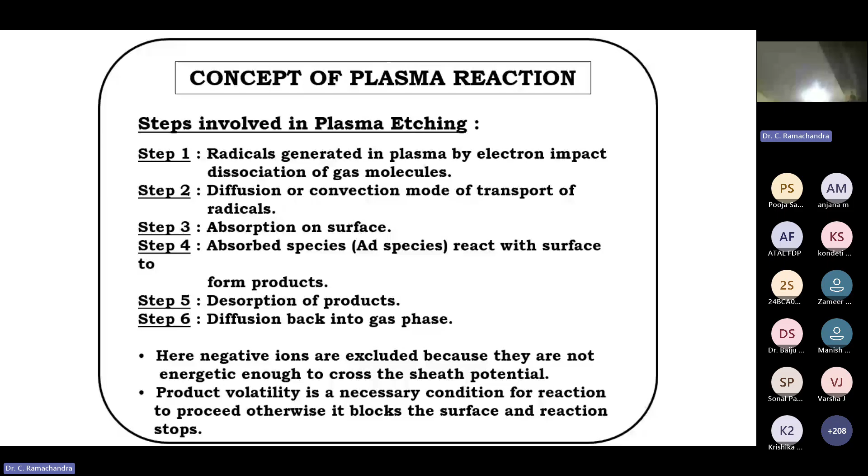So what is the probability? How many molecules out of 100 will reach the surface? That is one question. Second, once it comes and touches the surface, it should not simply go - it should get absorbed. What is the probability? Suppose 10 molecules get absorbed by the surface. Then once absorbed, it has to react with the sample through chemical reaction. Once it reacts to form the byproduct, it should get desorbed. If the byproduct is not desorbed, if it stays, that is another headache.

These byproducts should be sucked by the vacuum pump, not the injected chemical reactions. But how can I control this? I cannot tell the vacuum pump to suck only byproduct, not the injected gas - they won't bother, they won't listen to me. But it is about the selection of process parameters, positioning of the chemical injection, positioning of the vacuum, and there are so many process parameters. It looks simple, but it is not easy.

Then I want to etch silicon or aluminum, different materials. How do I know where to stop? There is R&D approach: if it's a small experiment, you don't need automation, you take it out after 5 minutes and see whether the silicon or aluminum has gone. That's for R&D. For production purposes, I need automated detection.

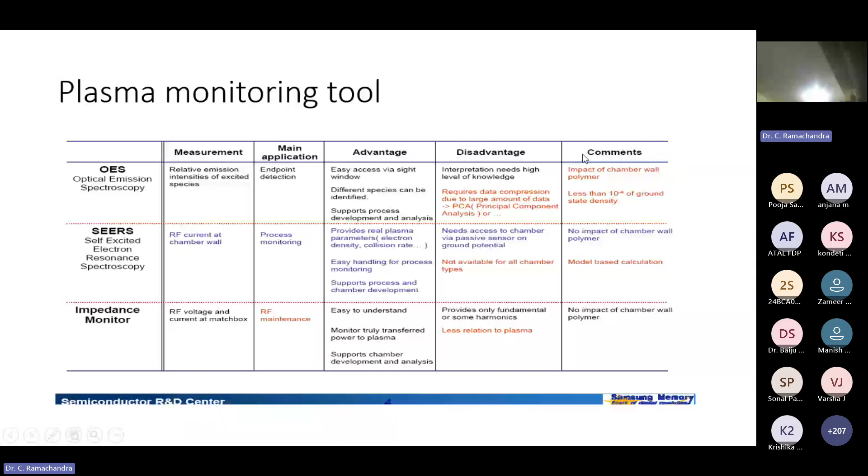As I said, when we have a plasma etch mechanism, it has a chemical reaction and a physical bombardment. Physical bombardment has directionality but poor selectivity. Chemical reaction has poor directionality but good selectivity. So it is a selection of process parameters to choose which one dominates. If you want more chemical reaction oriented etch or sputtering etch, it depends on process parameters. If you take more ion energy, sputtering will be more, and chemical reaction effect will be less. So you can optimize the process parameters.

So what are the requirements? Etch rate is important from a manufacturing point of view, I should finish it off in a few minutes, not worth taking a few hours, productivity will be affected. Selectivity is important: I want to etch silicon but not silicon dioxide, or aluminum but not silicon. We have different combinations of selectivity. Etch profile: most cases we want it as vertical as possible. And particle contamination: my whole process should not generate too much contamination that degrades device performance.

Process parameters: if using RF or microwave, power is very important. Distance between anode and cathode affects device process performance. Gas flow rate, and not only flow rate, where do we put the gas? Gas injection should not be very near the vacuum suck point, otherwise my whole purpose is defeated, whatever gas I inject will go straight to the vacuum and will not even reach the specimen. Impedance mismatch is important, too much mismatch causes a lot of heat dissipation. In some cases we heat the sample for proper processing, so substrate temperature also becomes important.

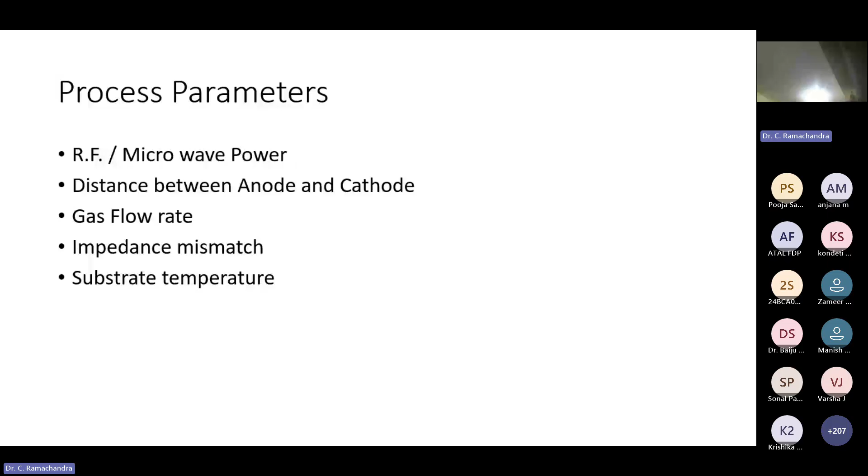Etch rate means thickness of layer, how many microns we remove per minute. Too high an etch rate becomes difficult to control. Production-wise it's good, you're fast, but controllability becomes difficult. Too low means manufacturing yield will reduce. So we generally optimize to about one micron per minute, which is a reasonable rate for manufacturing.

So there are different types of plasma: DC plasma, RF plasma. DC plasma is not good for insulators, it's good for conducting materials. RF plasma works for both insulator and conductor. ICP, inductively coupled plasma, gives high energy, high density, and microwave plasma is very good for some specific materials. So it is just a configuration.

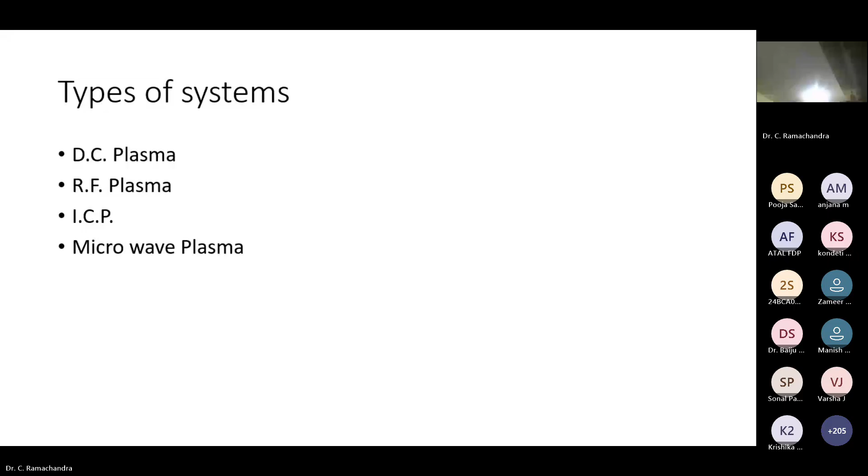So now I am showing two case studies which are very, very important. This work was done more than 20 years ago, but at that time it was highly challenging. I had the opportunity, this was the first time we developed this technology in the world. Because it was a manufacturing industry, they did not allow patenting, that is industry policy, but it was quite challenging. I will show you the meaning of IBC, how we were successful in finding the IBC, and how it helped production and detection of cell to cell short.

So both of them require a very precise combination of wet etch and dry etch. So what is the meaning of IBC? IBC stands for insufficient buried contact.

It is one of the unique failure signatures in semiconductor devices, particularly in memory. But electrically, when this failure signature comes, it is very difficult to confirm the actual reason. So we need to understand what IBC is.

All semiconductor devices use a polyplug. In fact, all your structures are sitting on the polyplug, whether it is memory cells or some other tungsten contact. It provides electrical contact for many of the functional plugs, and it provides structural support for many of the functional plugs.

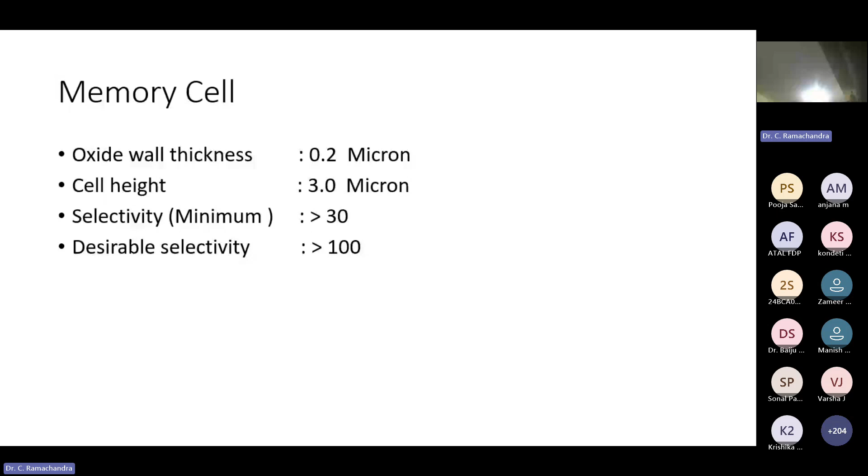If we calculate, typically desirable selectivity is 100, more than 100. That means I want to etch silicon, but not damage the oxide wall thickness. So these were all various challenges we had. And we did not have a very expensive system like ICP or ECR, because their maintenance cost is very high. We also did not have certain high selectivity chemicals because they were not used due to their hazardousness.

And whatever method I tried, it was to retain the oxide wall—that is very important. Even though it is 0.2 micron oxide thickness, I should make sure it does not get damaged, with controlled removal of tungsten silicide and controlled etching of the memory cell plate. Then I have to remove each memory cell and etch the polyplug, then I can see whether it had made a good contact or not.

And I need to check the impression. Like with a small coconut plant—whether it was seeded properly or not—if you lift it, you can see its impression below the ground. If it was not put in enough, it stays on top of the mud and comes out without leaving an impression. Similarly, I am seeing the impression by doing all this work.

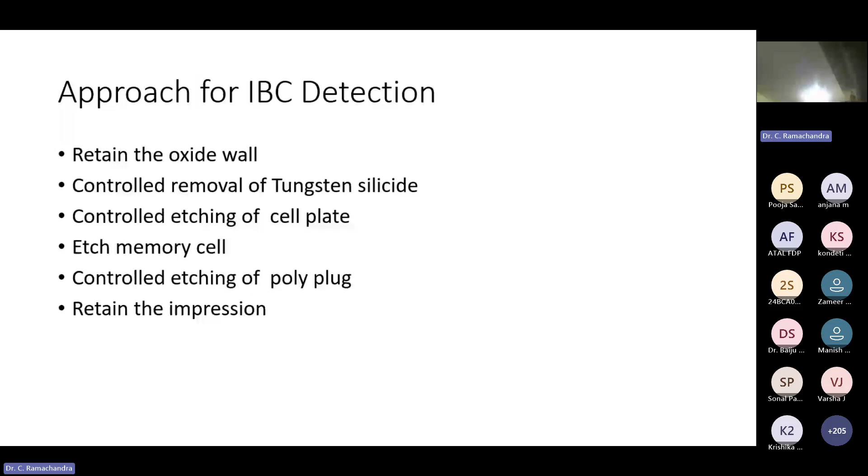So it requires controlled etching of the memory cell, controlled etching of the polyplug. I did a lot of calculation and concluded that in my system, I have to use as low power as possible. It was a 600 watt RIE system, but when I went below 40 watt, the plasma started triggering and flickering, so it became unstable. Therefore I cannot go below 40 watt. I found that around 60 watt gives low and stable RF power.

Then for operating pressure, I did some calculations for the chamber and worked out around 100 to 120 millitorr. Etch time cannot be too large for industry purposes, so somewhere around 12 to 15 minutes was acceptable. Overetching is also a problem, it will damage the impression, so I need to make sure it is not overetched.

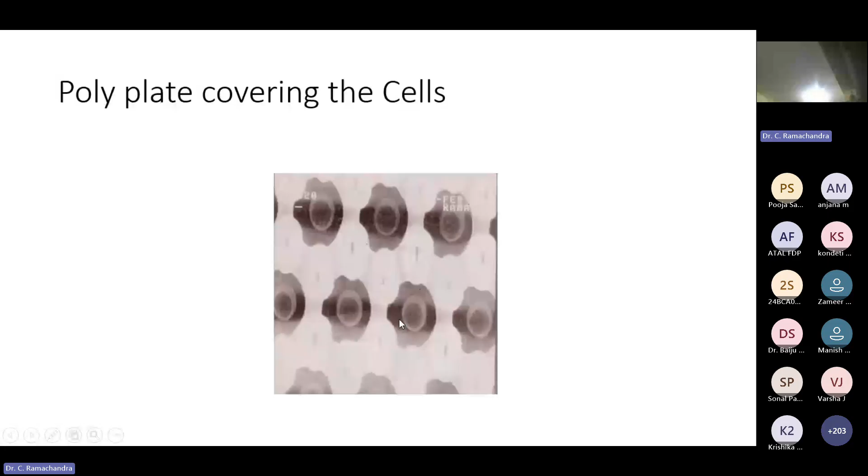This is what you see - a polyplate covering the cell. There is a polysilicon plate, very thick, and you have to remove it in a controlled manner. So we did many experiments.

These are all memory cells. For example, data 1 is stored in a memory cell in DRAM - this cylindrical structure. These are all the ways data 1 or 0 is stored. There are 512 million memory cells. I can see every individual cell, and now you can see there is a short between these two cells. We were successfully able to see the short between two cells in a very effective manner. This technology I developed 20 years back was quite challenging and good.

Like that, there are hundreds of requirements in the industry. We have so many challenges and opportunities to work on etching. This is for the plasma etching system, which is widely used. There is another system called ion beam assisted etch. It is a very complex, very expensive system, a very slow process with low throughput, and requires very skilled operation.

It requires a lot of skill, but its advantage is being highly localized. Sometimes you don't want to remove material throughout the whole silicon chip - you want to remove it at one selected point, maybe 1 micron or 0.5 micron. That kind of application - failure analysis, fault detection, fault confirmation - is where it is used. It is not used for manufacturing.

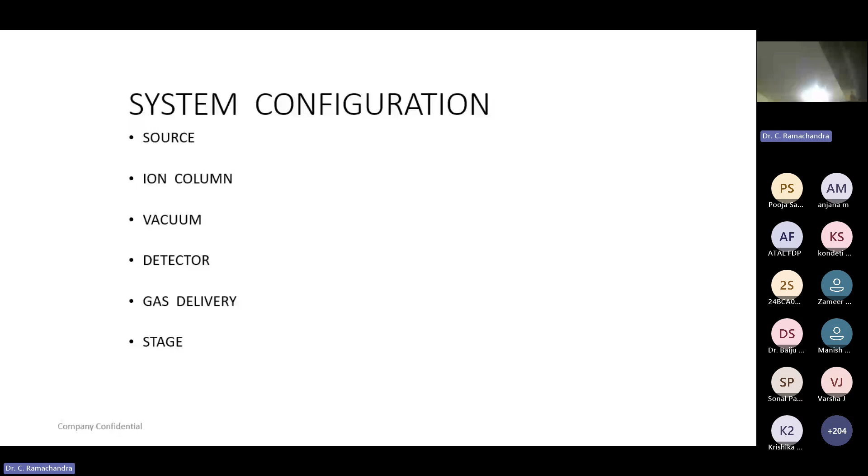It is a very expensive system. If you look at the system configuration, it has an ion source, ion column, and vacuum because we need vacuum for the electron ion. Then we need a detector to get the image. It also uses different gases, a gas delivery system, and a stage for very precise process control. This is a typical system.

We have a focused ion beam system. It is supported by infrared for imaging, and gas assisted etching, which uses different gases to etch nitride, silicon, etc. I can position the beam or the stage very accurately using a laser guided stage. It also has a navigation tool - if you have a GDS map, you can load it and tell which coordinate to go to, with submicron scale precision.

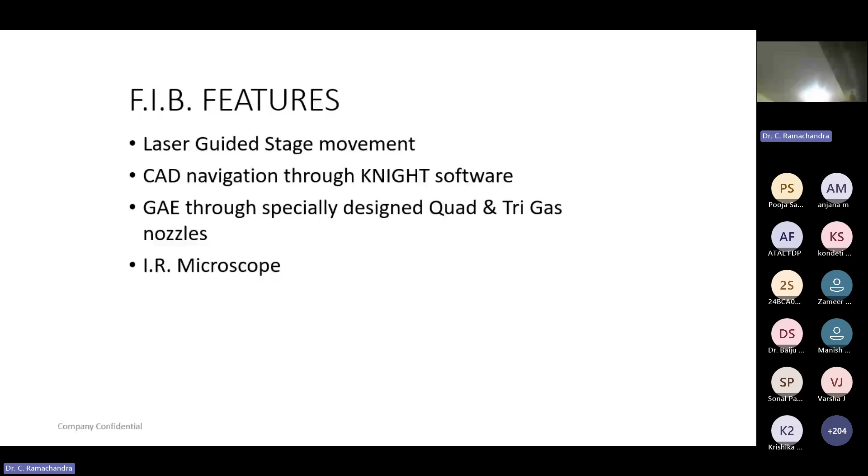So important features are: it has laser guided stage movement, so stage precision is like submicron. It has CAD navigation through KNIGHT software. It has gas assisted etch - we use different gases for etching silicon, silicon nitride, silicon oxide, aluminum, etc. It has an IR microscope, and sometimes we can do backside etching using the IR microscope. We can do both front side and backside modification.

The main thing is it has a gallium, liquid gallium ion source. These ions are accelerated, focused, and made to fall on the specimen. Typical ion energy varies from 30 to 50 kiloelectron volt. There are various parameters to choose: pixel size, pixel spacing, dwell time, refresh time, nozzle spacing, nozzle temperature - all of them we need to optimize for a given process.

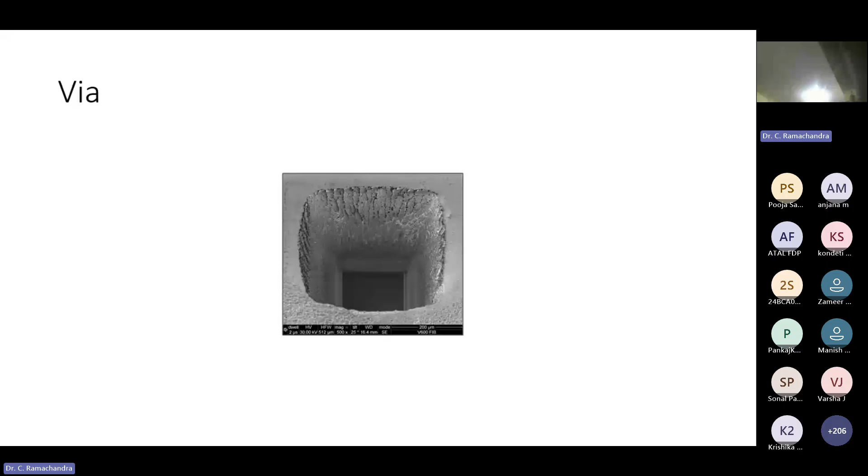So this is very submicron scale etching. Similarly, I can create a via. When I say device, it has multiple layers - sometimes you have the top layer, sometimes you go to the bottom layer and do the edit. You can cut the material, and in fact you can also add metal, that's different. I can create a via structure so that I can access different layers below the top surface, of different shapes. This is very important at micron scale, but it is not for production purpose.

So we must have a precise location where we want to do this kind of modification or removal of material. For that, we use laser assisted stage and CAD assisted navigation. So we can mill or etch to submicron or micron features. In fact, we can deposit also - that is another application, which does not come under the category of etching. We can add conducting material, we can add insulating material. So this is basically called microsurgery.

So it can create 3D submicron structures - a lot of applications. It works, though it costs 10 crore, but this is etching in vacuum, highly localized, and it is not for a production purpose.

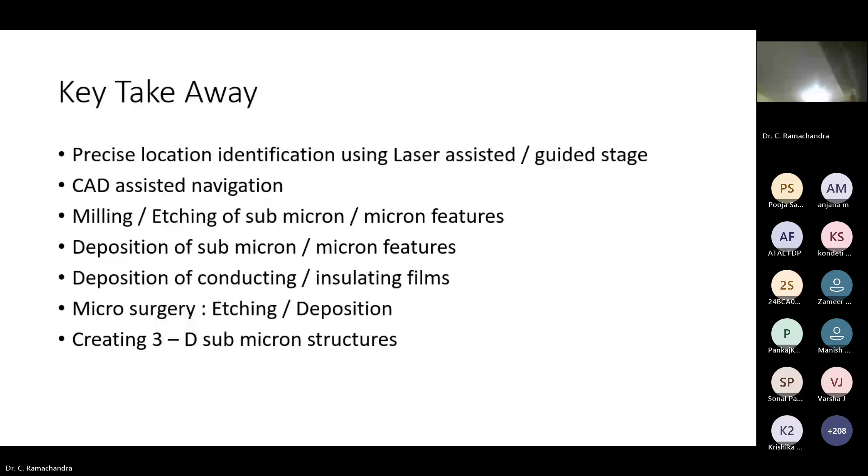Now, the main theme of this workshop is AIML, the role of AIML. So I prefer to call it MLAI - that means first the machine has to learn, then only it can do the AI.

So what are the opportunities? If you come to lithography, there are thousands of distortions of different pattern image printing. I want to print different patterns, and I have thousands of distortions - we need to understand those distortions. There are thousands of deformations in profile due to etching. When I etch, I don't get vertical profiles always, sometimes there are different slopes, different kinds of etching.

I do not know what is the distortion in the image printing, or what kind of deviation or deformation has occurred. Finally, what do you see? Millions of deviations in electrical signatures.

So there is leakage current decrease, leakage current increase, threshold voltage drift, some performance degradation, temperature instability. There are so many that we see in every device's performance. There are millions, billions of transistors, and each transistor has dozens of structures responsible for it. So how do I correlate?

How do we collect this huge database? How do we have a learning so that my machine can correct automatically? If my device has some degradation, is it due to this step? There are lithography steps, dozens of them. Etching, there are dozens of steps. Which step has caused the problem? Can we correlate it? Understanding specific signatures and taking automated corrective action, this is the biggest challenge in industry.